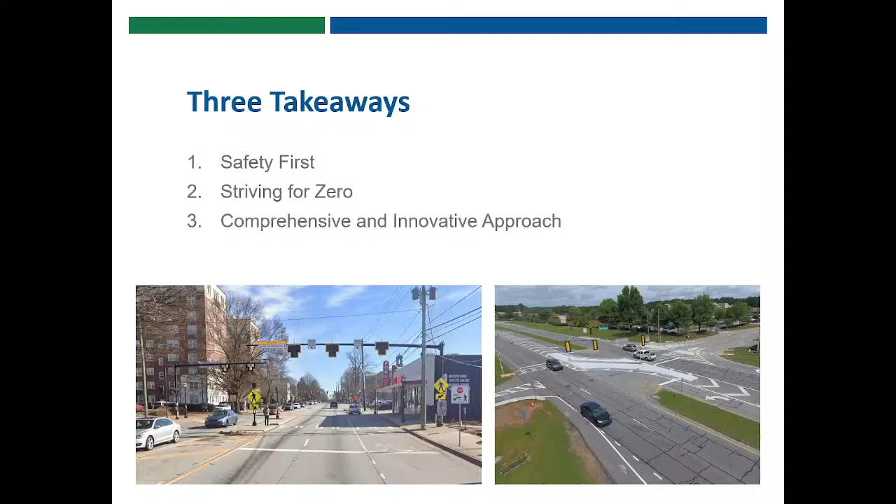A comprehensive and innovative approach: we like to take a proactive approach to address the multiple factors that influence crashes. By exceeding federal requirements, implementing innovative safety countermeasures, and using innovative data, we can be at the forefront of safety for this nation.

So the GDOT safety program, as I said, these are the HSIP dollars, federal dollars. And we look at things in terms of severity for crashes. As you can see below, we have the KABCO scale. K represents fatal, then you have your 3 levels of injury: A is serious injury, B is minor injury, and C is complaint injury. Then O stands for property damage only.

HSIP provides federal funds for the implementation of safety projects on our roadways. By conducting data analysis, we can allocate resources strategically and prioritize projects that will result in the most reduction of fatal and serious injury crashes.

We have safety performance targets, set by the state and assessed by FHWA. These include 5 metrics and 3 special rules. The metrics are based on number of fatalities, fatality rate, number of serious injuries, serious injury rate, and number of non-motorized fatal and serious injury crashes.

We also have 3 special rules: high-risk rural roads, older drivers and pedestrians, and vulnerable road users. That last one is actually the newest special rule that was signed into legislature with the signing of our bipartisan infrastructure law.

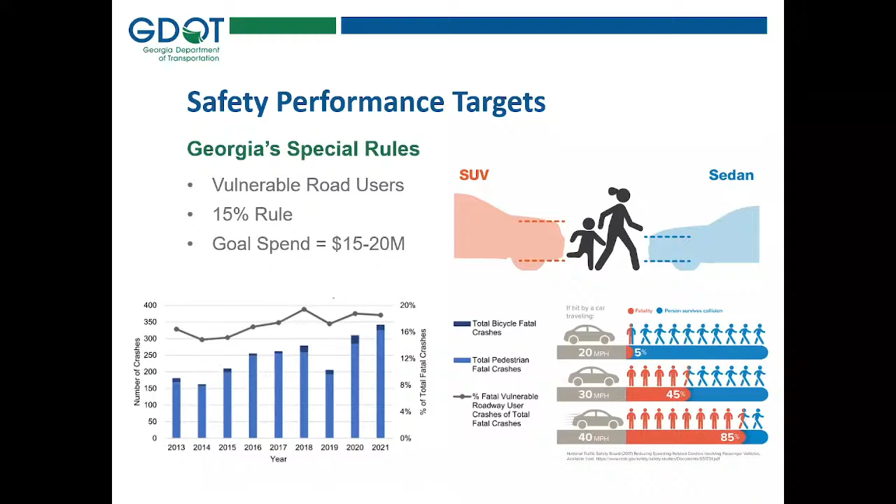That's 15%. I'll start with what is a vulnerable road user. These are pedestrians, cyclists, people walking, rolling, biking, whatever it may be, and they're vulnerable. If 15% of your fatalities are attributed to that emphasis area, the following fiscal year, you are required to allocate 15% of your HSIP apportionment to that emphasis area.

And here you can see some data why. At the bottom, we have a graph just showing the percent of our vulnerable road users compared to our fatalities. So we are definitely hitting that 15% mark, we're closer to the 18-20% range. So this is definitely an identified emphasis area for us.

And why? Well, because they're exactly what they are: they're vulnerable. Due to the size of vehicles, there's limited sight distance. Speed is very, very impactful when it comes to our vulnerable road users, and you have a much higher likelihood of not surviving a crash going 40 miles per hour.

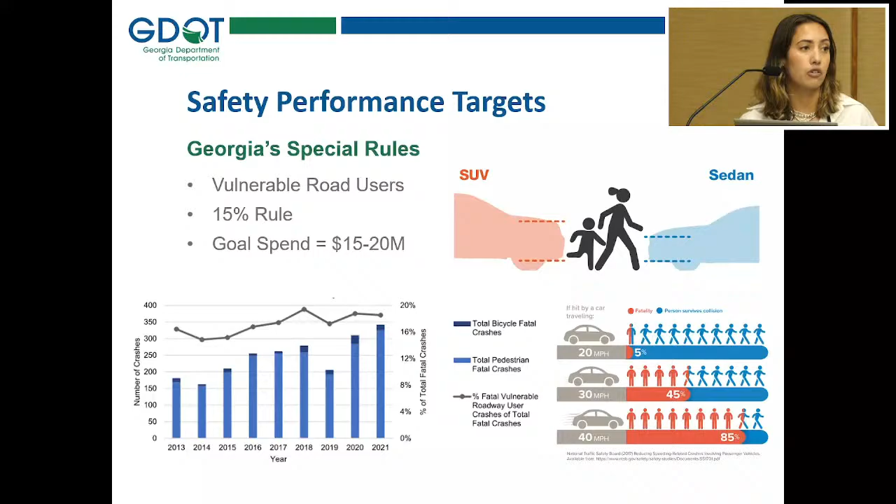All right, so why are we seeing this trend? What's going on? Because again, this is nationwide. This isn't specific to Georgia.

The year 2020 really marked a turning point with the pandemic disrupting daily routines, travel patterns, and overall road usage. Despite initial declines in traffic volumes during those early stages, unexpected consequences emerged with speed. The combination of fewer vehicles on the road altered driver behavior and increased risk taking, resulting in a surge of fatal and serious injury crashes nationwide. You can see data to support that. People were speeding more, not wearing seatbelts, maybe driving under the influence or distracted. People were stressed out, and that translated into their behavior on the roadways.

All right, so let's talk about Georgia and our crash trends and where we're going. I did this based on the 3-year moving average instead of the 5, because that's what we're moving towards. The reason I want to bring this up is because, due to the data we've seen since COVID, we're most likely going to continue having to write these implementation plans for the following years due to that data impacting us. As you can see, we were declining for fatalities from about 2016 to 2019, and then COVID really hit us hard.

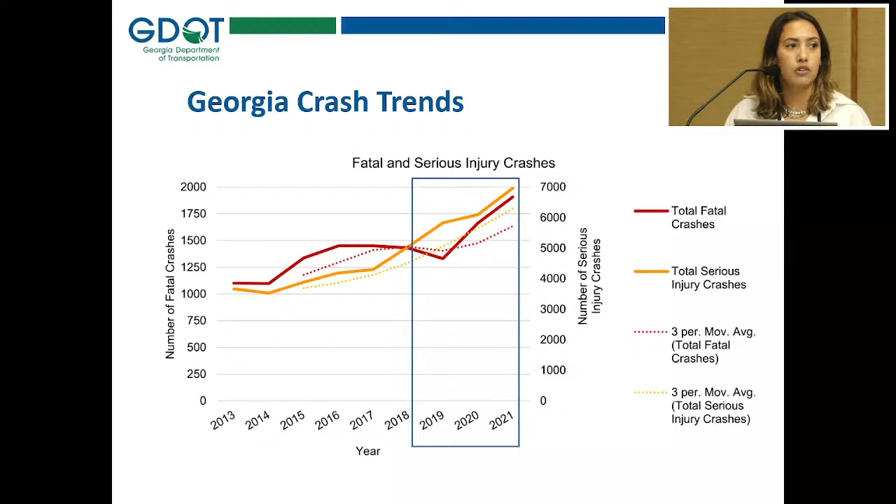And then nationwide, what we're also seeing here is just a general increase in our serious injury crashes, and I'll talk more about that soon. But for this year, 2023, we are seeing current trend downwards. So we are confident that we're actually making it out of those COVID years, you could say, and we're returning back to a more normal driving behavior, driving pattern, and things like that.

All right, so let's talk about the fatalities. 53% were roadway and lane departure, 20% of those being our vulnerable road users. And when we look at intersections and angles, 34% of our fatalities are happening at intersections, and angles account for 23%. This just shows you what we look at in the data and how we identify the projects to help reduce these numbers.

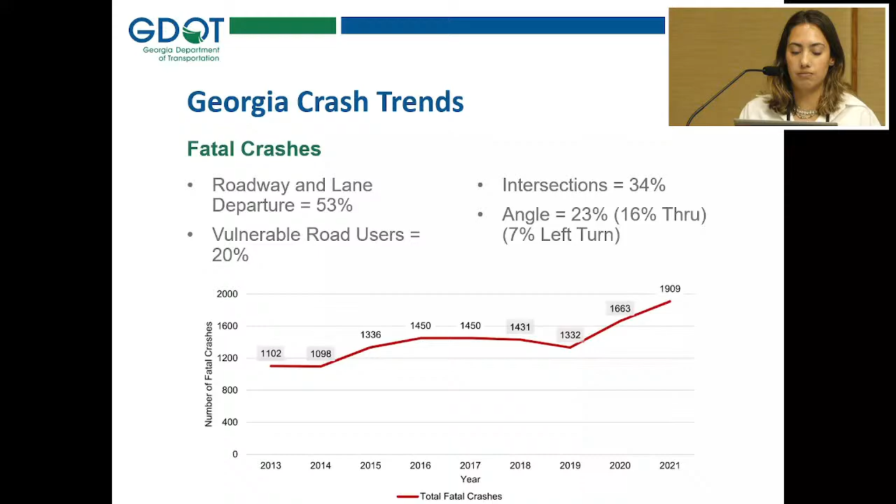Let's take a look at it by road user. Vulnerable road users include pedestrians and bicyclists here. You can see that pedestrians are much more significant than cyclists based on this data for fatalities, and you can see a marked increase too with the onset of COVID. That proportion is just increasing at, frankly, an unacceptable rate.

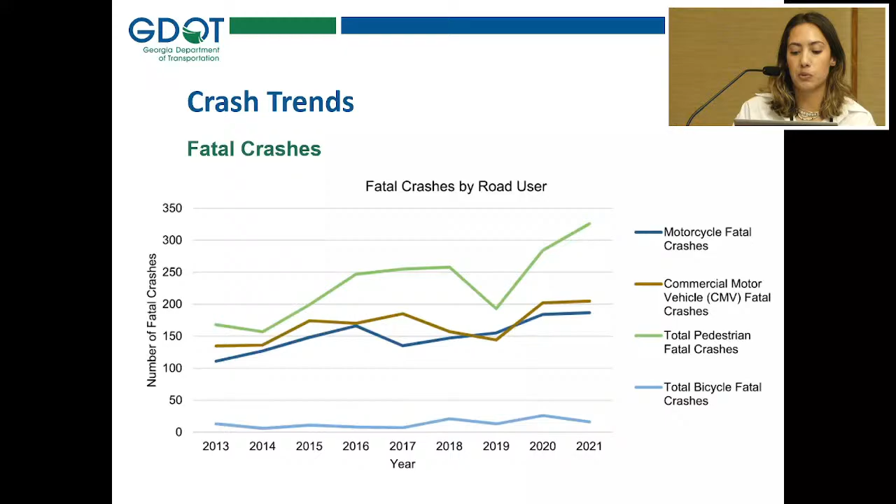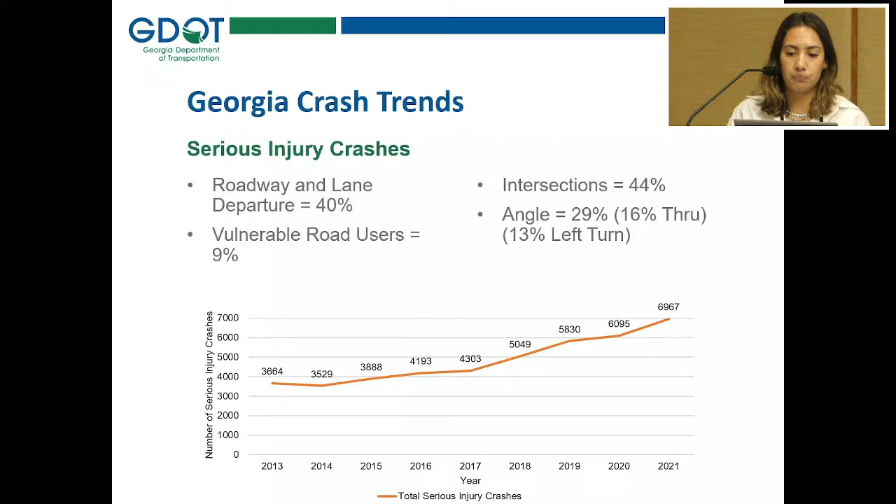All right, so that kind of leads into our emphasis areas. How do we come up with these emphasis areas? We look at the crash data. So here we are: we have our vulnerable road users, roadway and lane departure, intersections, which goes along with our angle crashes as well. And then I put our special rules, as well as off-system safety.

All right, so we are a benefit cost-driven program. So everything we do, we take a look at, and these are our numbers. Overall, we're seeing about 239 BC, and that's mainly due to all the rumble strip packages we've been doing. As we identified, roadway and lane departure crashes were an extreme emphasis area for us, so we rolled out rumble strips, cable barriers, those types of projects, and we're able to do so with quick delivery, and we're seeing reductions this year. But these are the type of improvements that we do for those specific emphasis areas. You can see we do lane reconfigurations, RCUTs, roundabouts, those type of intersection improvements, and then we also have our pedestrian and cyclist improvements.

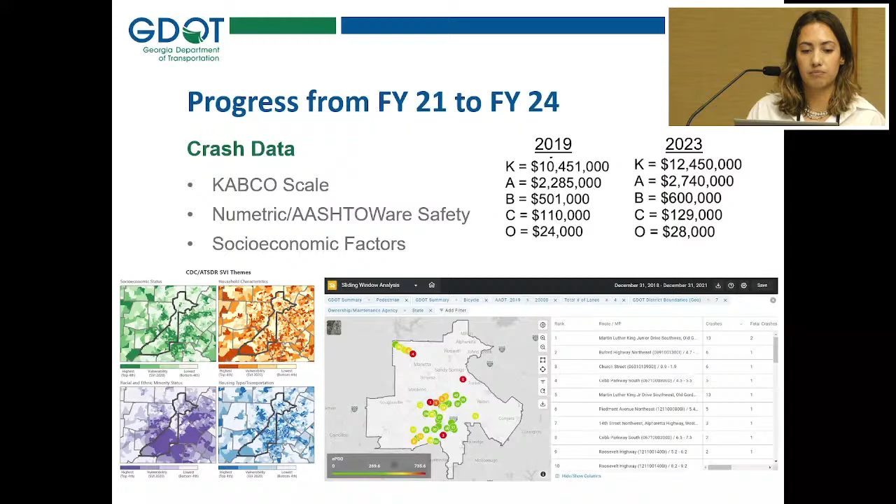Another goal was quick delivery, and again, we've been successful about this. From then to now, we have developed three new delivery mechanisms because our goal is to get to zero. How are we going to do that? We have to actually install infrastructure, so we need to make that as easy and accessible as possible. We've come up with a menu of service design, essentially a PDP light. Any project that has no right-of-way and limited environmental impacts can use this delivery mechanism, with a shortened P6 schedule, and we can get projects out in a year, which is incredible.

These types of projects can range anywhere from packages of PHBs all the way up to a roundabout. So there's a lot of opportunity with this delivery mechanism.

We also have our equipment purchase program. Basically, we'll purchase the infrastructure, and then the local agency has to install and maintain it. That's another way we can get that infrastructure out there faster, and it's also a great partnership with our local agencies.

This next one I'm most excited about is called IDIQ. For the first time ever, safety will have an on-call contractor that is able to go out and do maintenance type efforts. I don't know how many of you have been on RSAs, but you can imagine the number of recommendations - striping, signing, and marking - that we make on those RSAs. Now instead of making them and just pushing that off onto the district, we can actually implement those recommendations, which is great.

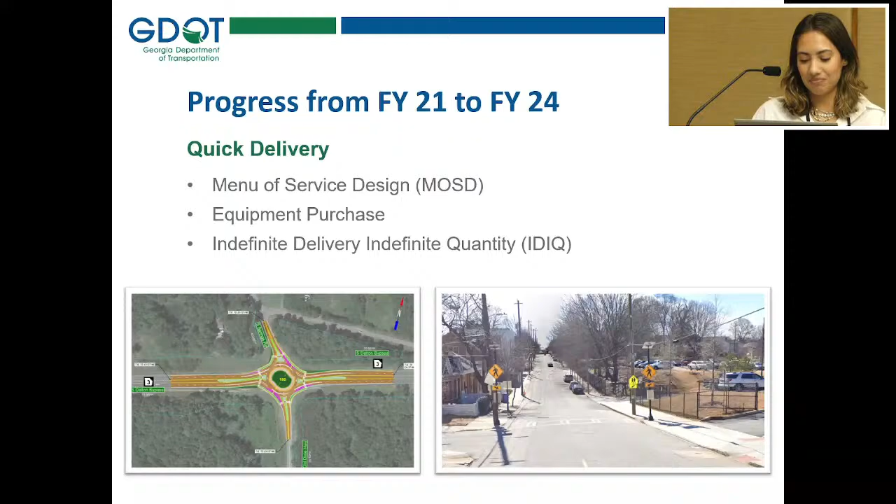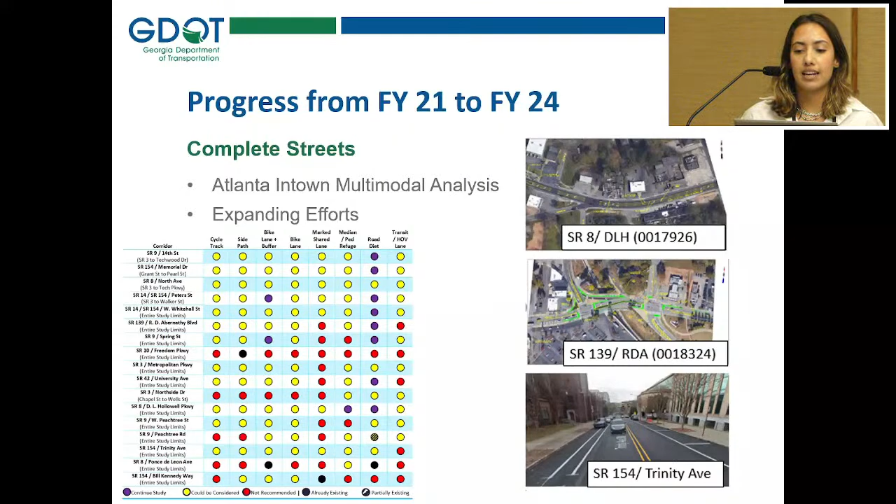Another thing we identified was complete streets. When we previously drafted this plan in '21, we had just finished the analysis for the in-town multimodal study. Since then, we have been successful at actually implementing those projects - great progress there. I think we identified a total of either 14 or 17 corridors, I can't remember, but a total of 9 are currently completed or in progress. What's really great is that has expanded into other complete street efforts outside of the city of Atlanta. So now that's another one of our emphasis areas - looking at roadway reconfiguration projects to help those vulnerable road users.

All right, so let's get into some noteworthy practices. That was the updates from the previous plan, but what else are we doing? What's new? Well, we're diving a lot more into systemic projects. One of them is sharp curves - we had some research conducted with Georgia Tech, and they came up with a really awesome tool that shows us where the sign should be and things like that, with different tiers of curves.

And then another one is our all-way stop - that speaks to the variability in crashes. Who knows when someone's going to be distracted and accidentally blow through a stop sign, resulting in a fatality. So what can we do ahead of time - advanced signing, advanced marking, alert drivers of the intersection so they're more aware - that's a little bit more of a proactive approach to safety.

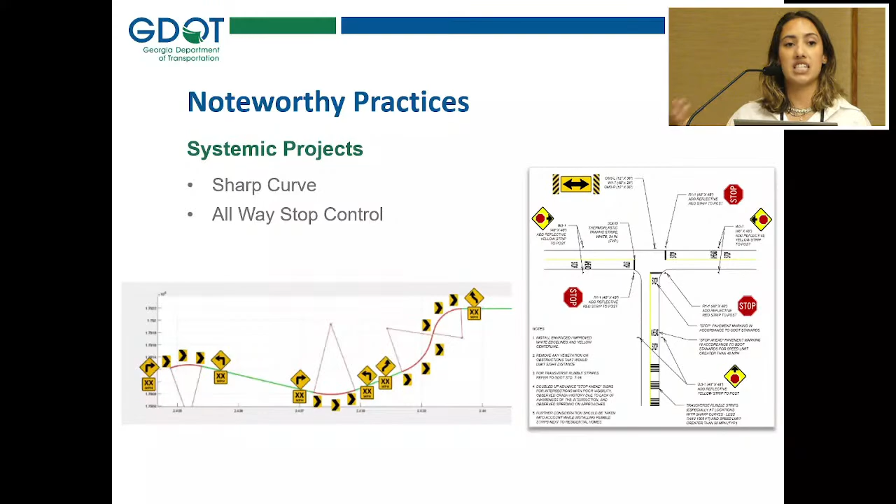All right, driver behavior, we talked about that, right? COVID changed driver behaviors, and that resulted in an increase in our fatal and serious injuries.

So under the umbrella of Drive Alert Arrive Alive, we have See and Be Seen for our pedestrians. We also coordinate with our office of communications, and they do PSAs for Drive Alert Arrive Alive on the interstate. They also do some for motorcycles as well, which we talked about earlier. The ones they do for that is Look Twice, Save a Life for motorcycles.

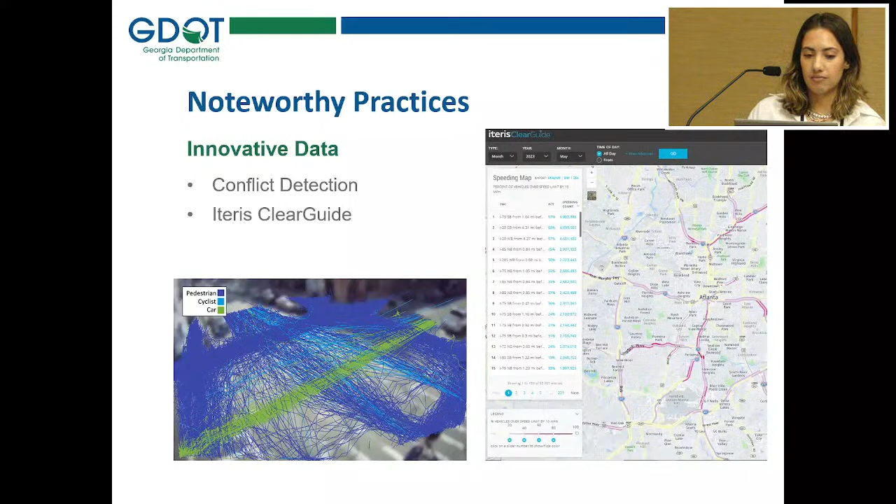And then tying in with the theme of the conference - oh, the places we'll go. This is what we identified in our plan as what we're working on, what we have in progress, and where we want to go with the program based on the data that we're looking at.

So again, our vulnerable road users - we actually have an entire other document that we're drafting about that. It's called the Vulnerable Road User Assessment, and that's due to FHWA in November. So we are currently working on that with in-house forces. Very proud to say that.

And we are also looking more systemically, looking at transit crossings, looking at trail crossings - how can we improve that infrastructure for our vulnerable road users and be proactive about it.

And then PHB design. On the bottom, you can see two PHBs on Ponce in the middle of Atlanta, and they look very different, don't they? So we have variations in the Z's, in the stage - one's one stage, one's two stage, and things like that.

So we're going to be doing some near-miss analysis on our existing PHBs to determine Georgia-specific preferences for our PHBs, essentially - determine optimal offsets as well as timing. Are there timing things we can do to help encourage vehicle and pedestrian compliance at these locations?

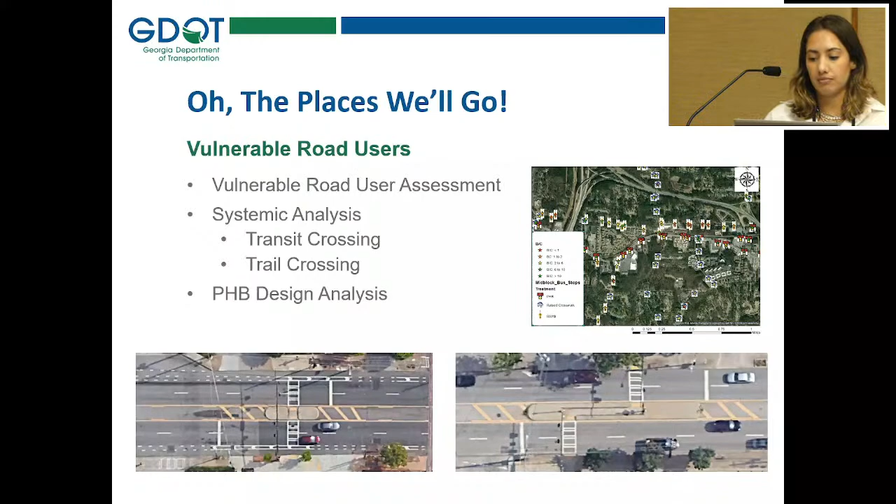And then, the places we'll go. Every Day Counts, EDC 7, is an initiative set forth by FHWA that promotes nighttime safety. We are going to do an urban focus, which will be our pedestrian focus, and a rural focus, which will be our sharp curves.

For our sharp curves, we're going to go back and do the LED chevron signs to help promote lighting, and then speed management as well. From COVID, the speeds really increased. The kinetic energy theory has velocity squared, so it's very impactful when determining the severity of collisions. So if there's something we can do to evaluate and help manage that speed, that's what we're going to be taking a look at.

And then our older drivers and pedestrians, we're going to dive deep into that data set. What's going on there? I took a high-level look, and it looked like there were trends generally increasing, with the number of fatalities increasing. But we want to take a look at that. When we talk about countermeasures, they're not really different from anything we're doing today. We just want to target them in the right places. So again, similar PHBs. Wrong way driving, that's a great one. Just target that in populations where we know there are higher numbers of aging individuals or senior living facilities, things like that.

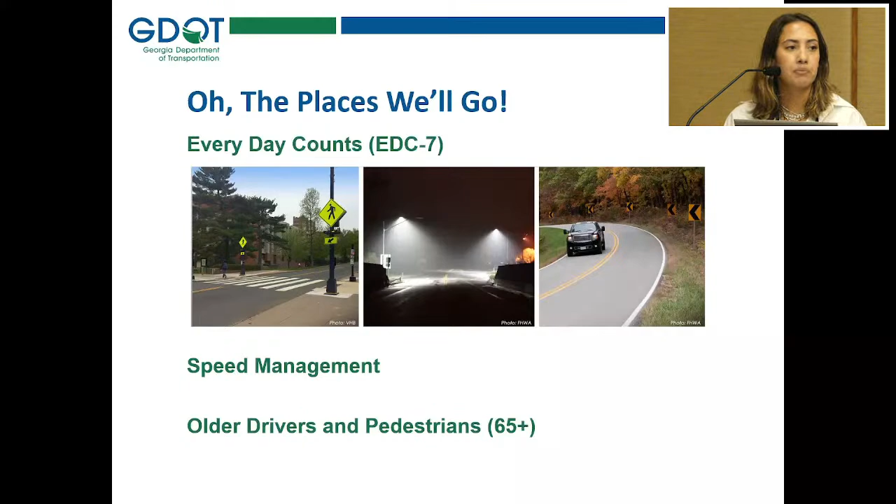And then going back to our 3 takeaways, safety first. We prioritize safety in every single project that we deliver. I know I'm talking for the safety group, but even outside of that, every single project that GDOT delivers has safety at the forefront. And we are constantly striving for zero. Our ultimate goal is to get to zero fatalities, and we're doing everything within our power to make that happen and make the roadways safe and accessible for all road users.

And then how are we going to do this? We're going to do it by taking a comprehensive and innovative approach, staying at the forefront of data, staying at the forefront of safety. And we'll hold questions till the end, but thank you very much.

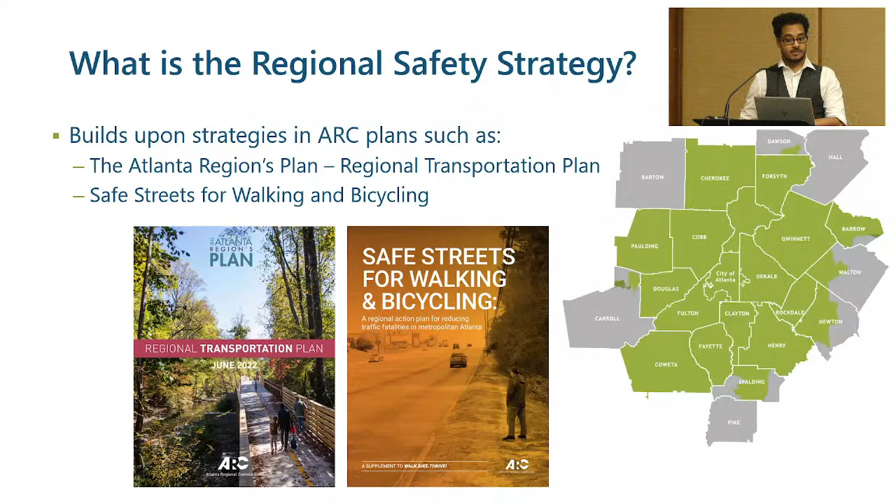One thing we really wanted to focus on were the economic and equity foundations of safety analysis and safety implementations. We took some FHWA analysis from a few years ago and focused it in on the Atlanta region. And what we found is that the average economic cost to the region of one fatality is $16 million. It's roughly $1 million for serious injuries. And those numbers are over about a 20-year period.

But if we take all of the crashes that occur within the Atlanta region and boil it down to year-over-year analysis, it's $9.6 billion in economic losses to the region. So that is what we are talking about when we are talking about increasing safety. It's not just day-to-day crashes, it's real economic loss to our region.

We also did an equity analysis, and the people who are most affected by these crashes, it's not spread equitably across our region. It's not just everyone. It's very focused on low-income residents, minorities, children, disabled individuals, and the elderly. They are disproportionately the people who are most likely to suffer from these crashes and serious injuries, and that is not even taking into account the familial and social effects of these crashes.

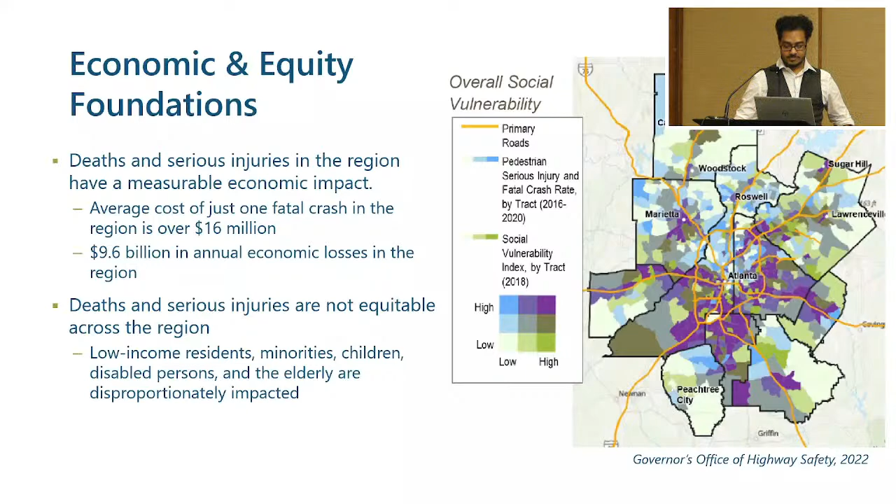Going into the planning side of it, how did we develop the RSS? We did a deep literature and data review, both of literature and data within the Atlanta region, national studies. We looked into NACTO and AASHTO studies on safety. We even went a bit internationally and looked at some international studies on safety and safety engineering.

We did really good stakeholder and public engagement through regional surveys, workshops, stakeholder interviews, and citizen focus groups. All of these were done virtually because we started at the peak of the COVID times when there was very little, if any, in-person, face-to-face work. But that allowed us to really reach out to a lot of more diverse stakeholders than we were usually able to do, and do it much more efficiently and economically. So rather than having to go to the outskirts of our region physically, we could do things over Zoom and Teams. And there are pros and cons to that. We were able to find a lot of pros by being able to do more interviews and engage more people than we are typically able to.

We, of course, did some really deep and robust data analysis and statistical regressions of our crash types, as well as a network analysis of what our roads look like and which road types typically lead to severe crashes. And we boiled all that down into safe street visualizations, which I'll give you a preview of, high-risk scenarios and lower-risk scenarios. How can we take roadways that are currently likely to lead to high-risk crashes and implement certain planning and engineering techniques to make them safer?

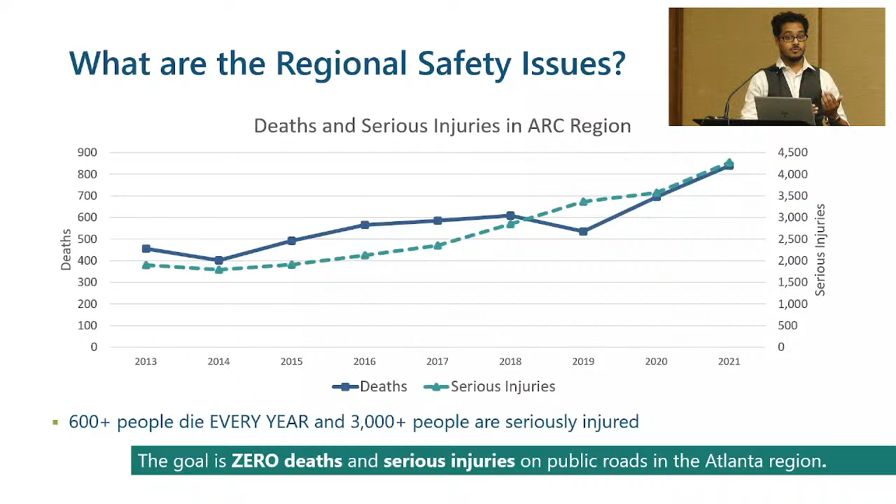We decided to focus in on three main crash types for this because they are the most prevalent within our region and the ones that are most likely to result in fatalities and serious injuries: crashes at intersections, crashes involving roadway departure where a car fully or partly leaves the roadway, and those involving pedestrians and bike riders.

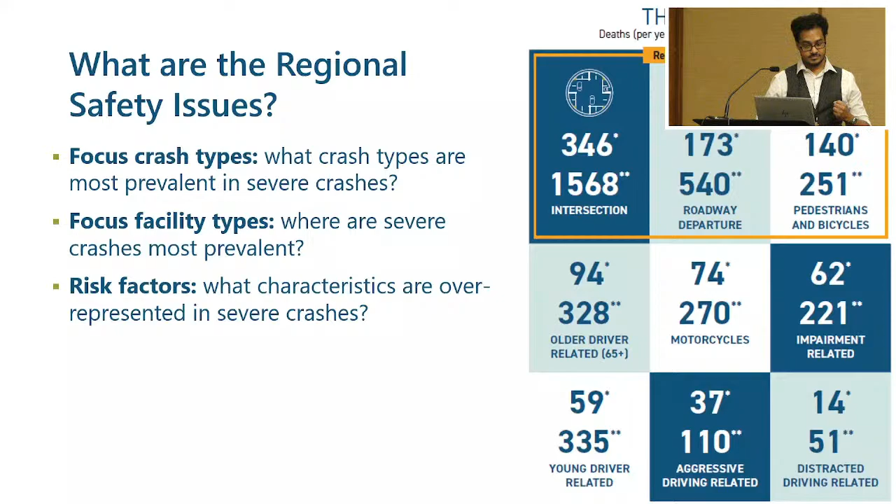And for that, we decided to focus in on what we're calling risk factors. So these are things where, from a community context or the context of how a road is built, it is likely to lead to higher risk crashes, to those fatalities and serious injuries. This is a proactive way to approach safety planning rather than just chasing crash data. So what we found for intersection risk factors is functional classification, ownership, operating speed, observed speed, community context, and traffic control techniques are things that lead to riskier behavior.

For functional classification, it is our principal arterials, minor arterials, and major collectors, these higher functional classification roadways that we see more of these intersection-related factors on.

Ownership is more of a proxy. So saying GDOT ownership, changing a roadway's ownership from local to GDOT or vice versa is not going to automatically make a road higher or lower at a safety factor. It's a proxy because GDOT roads tend to be wider lane, higher speed. They tend to have certain sightline issues that either cause speeding or can cause riskier behavior. All the work that Kelli and her team at GDOT are doing are actively trying to address those factors, but historically, roads owned by our state DOT have these risk factors that lead to riskier behavior, riskier driving, and these more severe crashes.

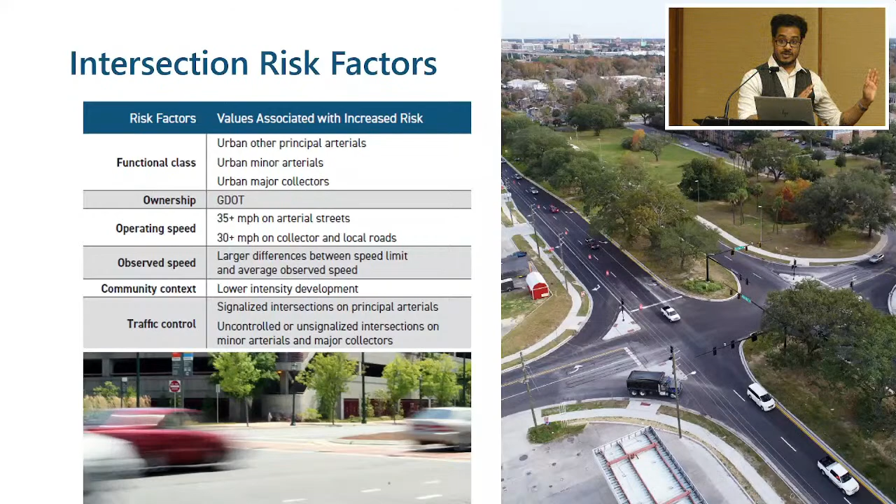Or are these very urban areas where you see smaller block sizes, a mix of residential and commercial use? For traffic control on principal arterials for intersections, we see high risk at signalized intersections. For lower functional classes, unsignalized or uncontrolled intersections are more risky. So all of these are very context dependent on multiple factors, and that's something we are trying to be aware of.

Moving a bit faster to roadway departure, somewhat similar factors apply: functional classification, ownership, traffic volume, posted speed, and community context are also very important risk factors here.

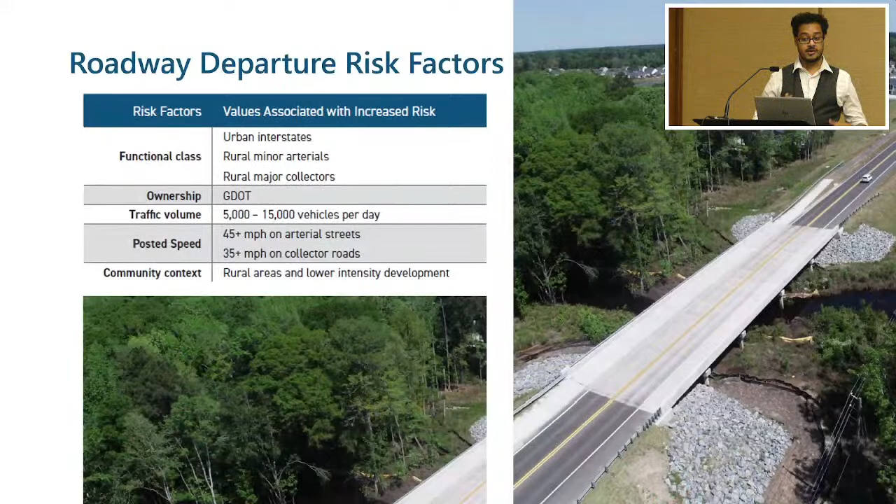For pedestrians, much of the same, but the numbers change a bit. Functional classification, we also see principal and minor arterials. Ownership tends to be GDOT roads, so it's our state roadways that see the most risk for pedestrians. Traffic volume and number of lanes really stand out as high risk factors—roads with over 9,000 vehicles per day and 4 or more lanes have the highest risk for pedestrians.

For community context, this is where we get into the more urban and dense areas. These are the places where people more naturally want to walk shorter distances and where we see more pedestrian activity, but we haven't always created a built environment that is comfortable and safe for those people to walk. For socioeconomic class, we see lower income and higher minority populations tend to be the most vulnerable.

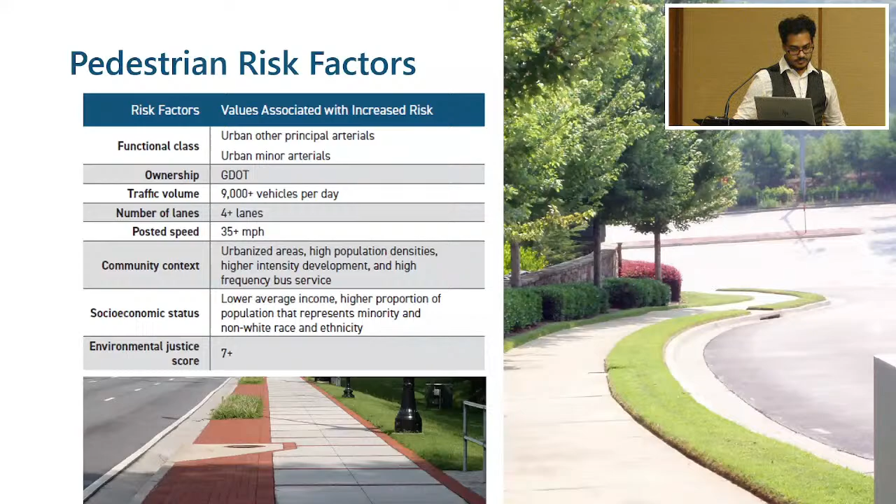For bicycle risk factors, we see a shift in ownership to our cities and counties—they are most likely to have streets that seem safe for biking or have some kind of bicycling infrastructure already in place. We also see a shift in traffic volumes and number of lanes, to those with 2 lanes or 2 to 4 lanes. Community context is still that dense urban area.

An interesting thing we pulled out from the data is a socioeconomic context. Those most likely to bike and most likely to find themselves at risk as bike riders show a bimodal split: those at the lower 20% of median household income, as well as those at the upper end of the scale. These people at the lower and higher end of the income scale all have very different reasons for choosing to bike—some might do it recreationally, some as an alternative to driving while saving up, or some for purely environmental reasons.

In some ways, that's very useful for us to consider from an equity perspective. In other ways, it doesn't matter—these are all vulnerable road users because for whatever reason, they are choosing to take a bike out onto the roadways, and we as public agencies need to serve them all.

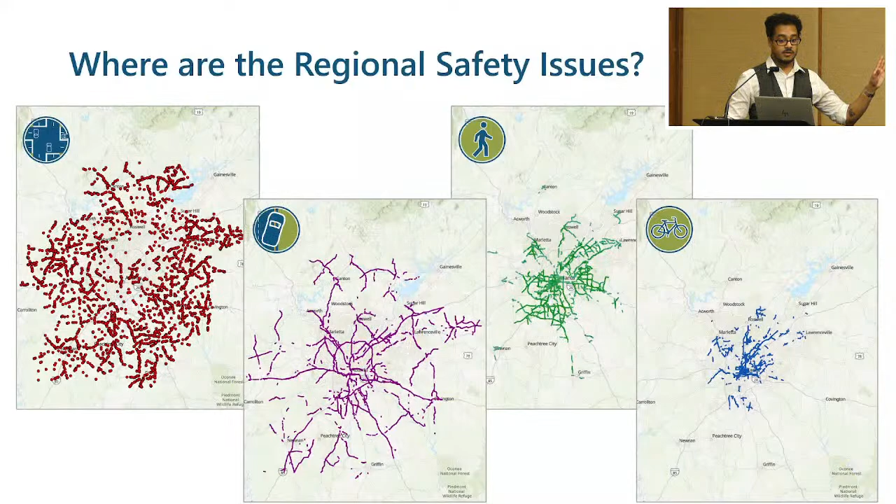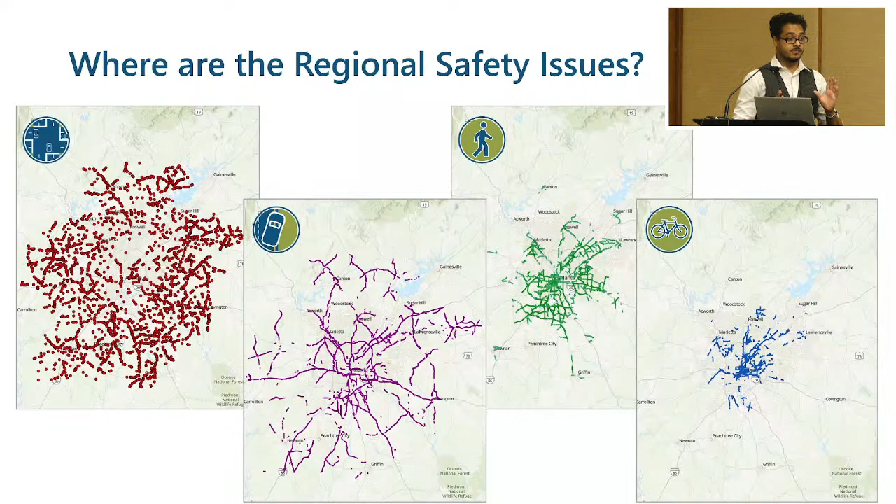We were able to take all of this data and create maps that are publicly available on ARC's open data website. These rank every intersection and every roadway and street within the ARC region on these different risk factors—for intersections, roadway departure, pedestrians, and bike riders. These have already been distributed to our local agencies, our friends at the GDOT planning office, and private consultants and friends in academia have also used them for their own analyses. This is a product that has already been distributed pretty widely.

For all of these, we want to focus in on proven safety countermeasures. These are from FHWA—engineering and planning techniques that local, state, and private agencies can really focus on, that we know can help solve a lot of safety issues.

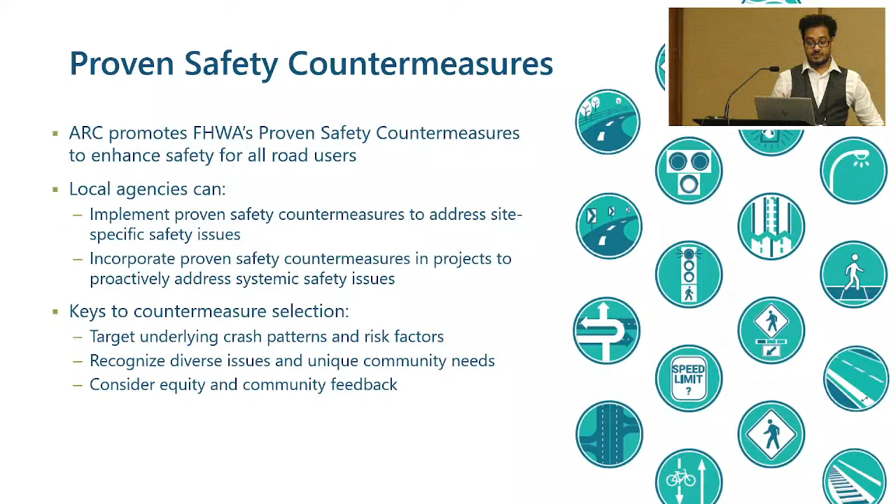For intersections, we see some simple things such as backplates with retroreflective borders. We see roundabouts becoming increasingly popular within the region and within the state. I believe GDOT has over 500 roundabouts throughout the state, with that number expecting to double within the next few years.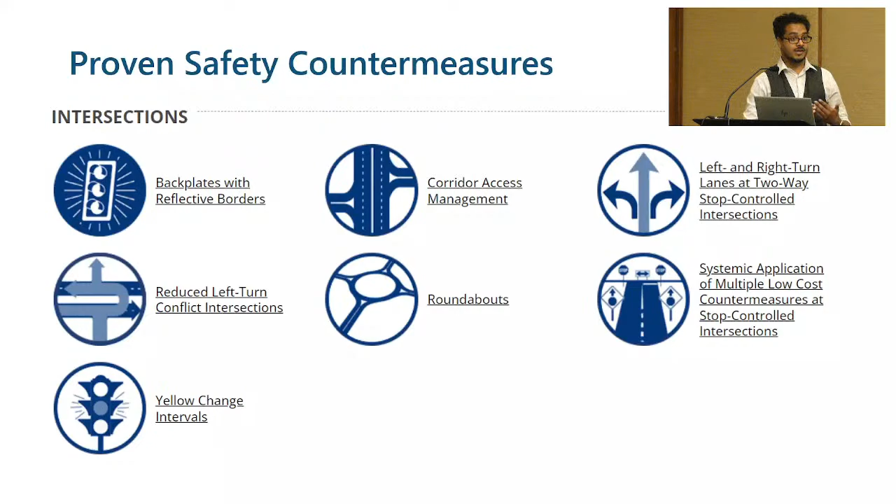So roundabouts are something that our partners at the state level are really aggressively trying to build out throughout our state, and that's something that at ARC we are happy to see. Various methods of corridor access management, R-cuts, yellow change intervals - these are all standard engineering techniques of ways to re-signalize intersections or rebuild an intersection, and they all have massive safety benefits.

Roadway departure, it is those rumble strips and safety edges that Kelli mentioned a little while ago. It is median barriers, having those guardrails along the side of the road that really help to prevent roadway departures, or when they do happen, make them less likely to result in a death or serious injury.

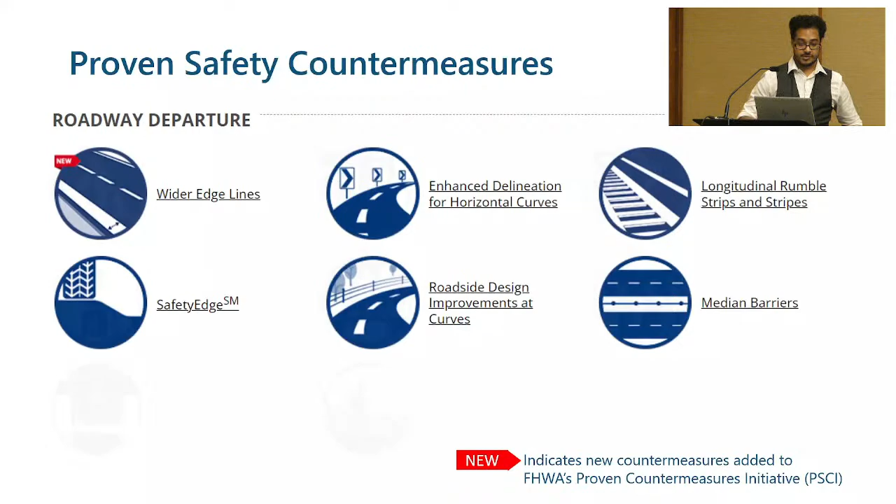For pedestrians and bicyclists, a lot of these work for both, and sometimes it's just a matter of how much right-of-way we use. Simple things: crosswalk visibility, pedestrian-focused lighting, bike lanes. At ARC, when we're doing project evaluation, we are largely going to be looking at bike lanes that have some kind of protection of steel, asphalt, or concrete. That will be context dependent. There are certain areas where just a strip of paint might be useful, but by and large, we're seeing that paint is not protection. So we're looking at some kind of barrier between people driving and people riding a bicycle.

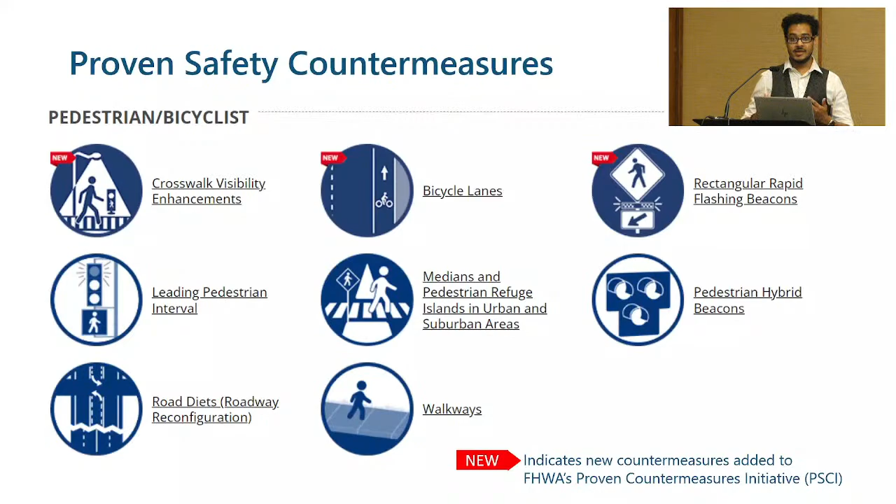Walkways and trails are a very standard thing for pedestrians and bike riders. So none of this is very new when it comes to engineering. It's just stuff that, for too many of our roadways, has been under-implemented.

And of course, speed management. This is something that can help drivers, pedestrians, bike riders, all kinds of roadway users. Anything that can help reduce speeds - whether it's speed safety cameras, which are currently not allowed within the state of Georgia, but if they were, these could help from an enforcement mechanism - variable speed limits on certain roadways, and then certain planning techniques such as local road safety plans or RSAs that our state is very aggressive at planning out and partnering with local agencies to do.

A little bit on our engagement approach. We went from a regional perspective. We had committee presentations to our governing committees. We did a lot of online surveys. We had a focused workshop that involved staff from ARC, our consulting groups, as well as some outside and citizen groups.

We did targeted interviews around the region and with peer MPOs and DOTs across the nation to better understand what they are doing to implement safety projects and to plan for them. And then we had, I believe, 7 citizen focus groups all across the region to gauge what our citizens and our nonprofits really want us to look at when we're doing safety analysis and implementation.

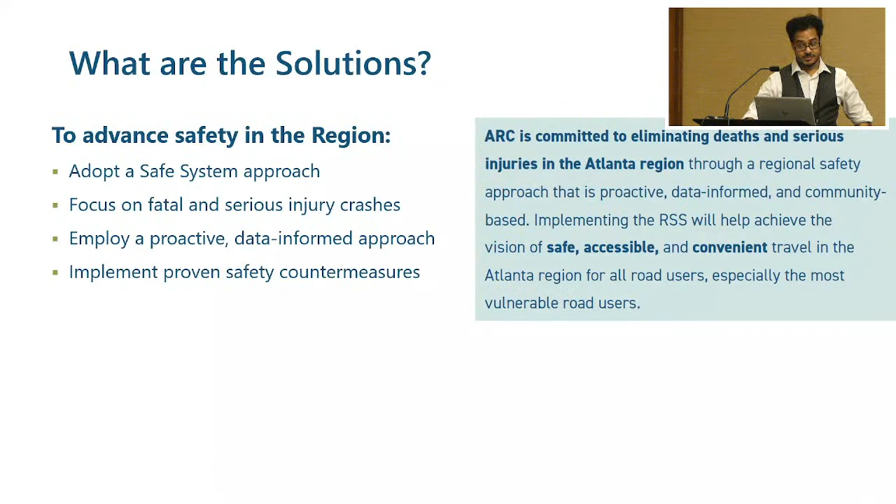Now let's go into the solutions. We want to adopt a safe system approach. This is something we're seeing the federal government really push, and something we got a few months ahead of them on. So, a few basic tenets of the safe system approach.

Deaths and serious injuries are unacceptable. We want to move to Vision Zero. Humans make mistakes, they are vulnerable. We just have to acknowledge that no transportation system will ever be perfect because they're being operated by imperfect beings.

Responsibility is shared, and that's a core thing of this, it's not about casting blame. This is not about litigiousness. This is the idea that responsibility is shared. So if certain roadways are seen as unsafe, there is a responsibility from the politicians in charge of that roadway, and the planners and engineers who made it or who could remake it. It is about accepting responsibility that I have the ability to do something different, so I should.

Redundancy is crucial. We have to create various ways that a roadway is safer, and safety is proactive. If we understand that a roadway is unsafe, we should try and fix it before there's a serious crash.

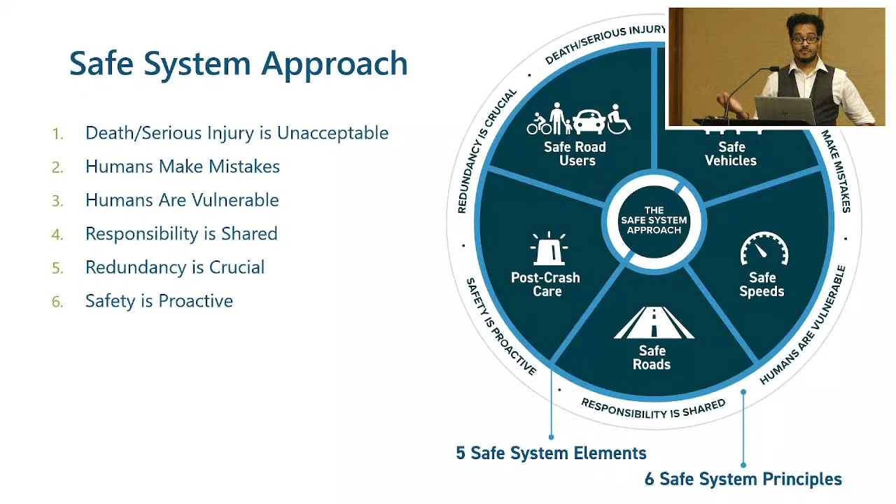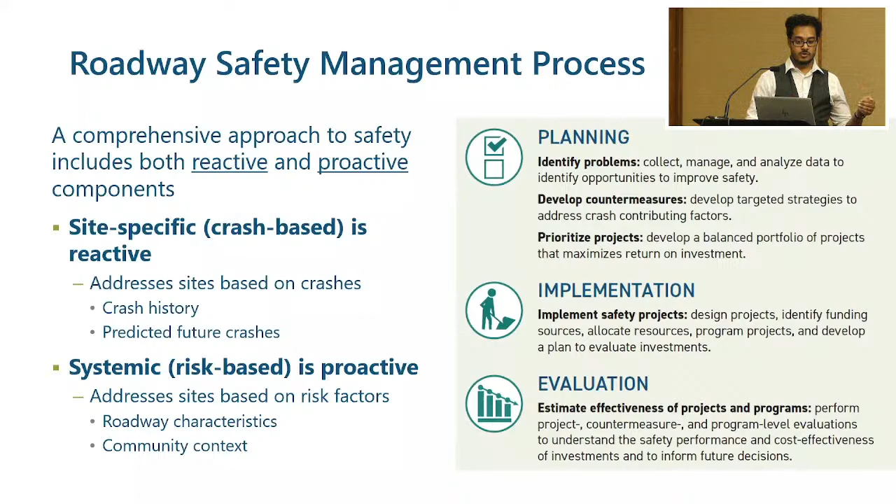Site-specific, crash-based versus systemic - we have to use both of these techniques. Some of it will be reactive to crashes and unsafe areas we already know exist, and some will be systemic, where we don't know if a crash or near miss has happened here, but we have proactive data analysis that suggests yes, it could happen here. So we have to combine both techniques moving forward, but at ARC, we're moving a bit more towards that systemic and proactive analysis.

Just to show off the map again, about one way we can be more proactive, we created a lot of high risk and lower risk scenarios for engineering and for visualization. I want to just go through one or two of them rather than all of them, given our time constraints.

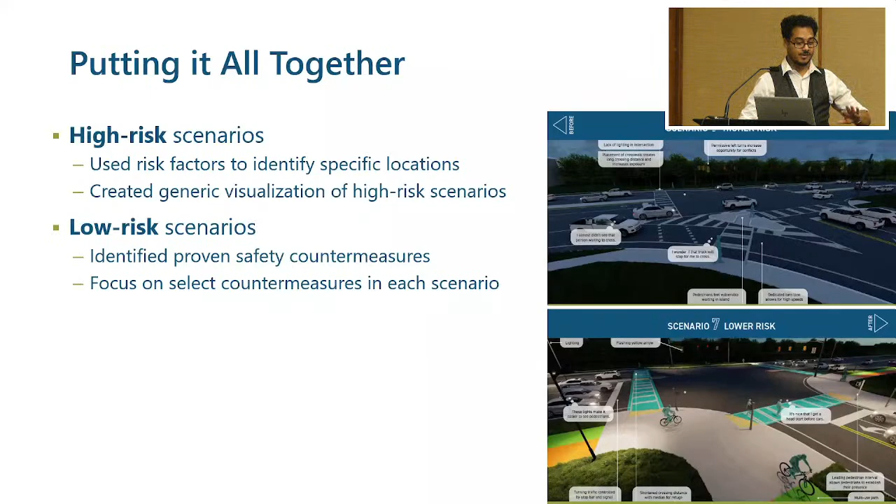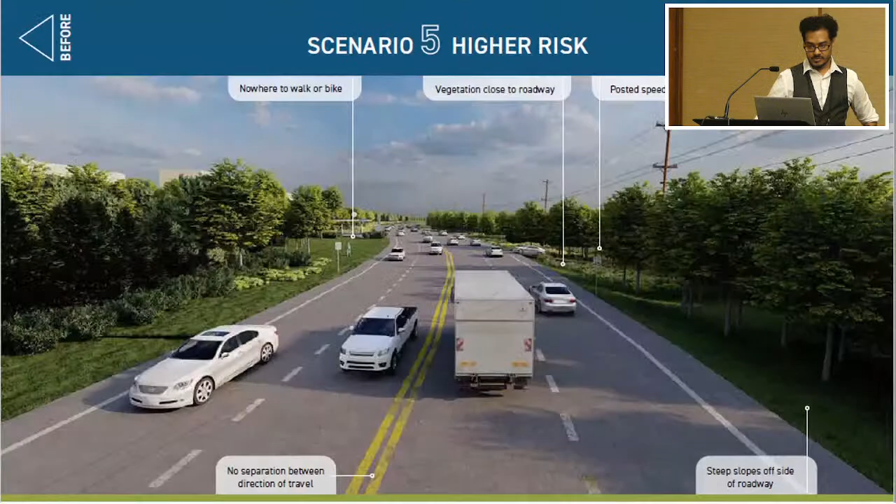All of these are on the menu of engineering techniques we can use. Most roadways are not going to go from this to this, but if we use even a few of these techniques to make roads safer, there's a lot of value in that for people who use it. So that's the idea here. It's not that you have to use all of these engineering techniques, it's that all of them are available to us and we should begin using more of them. Gonna skip ahead.

All right, a little bit on the safe system approach again. Our traditional approach for decades has been preventing all kinds of crashes. Safe system suggests let's move specifically to deaths and serious injuries. If we can reduce the most severe crashes, we are likely to reduce all the other ones as well.

We focused previously on improving human behavior. Safe systems suggest that humans are going to make mistakes. We should care about human behavior, especially when it's something preventable through more education. But in general, we should care more about designing for human mistakes and limitations, that we can fix a lot of these human behavior problems, such as speeding and distracted driving, through engineering techniques. We can either make them not happen at all, or if and when they do happen, reduce the risk. We can make more fender benders as opposed to deaths and serious injuries.

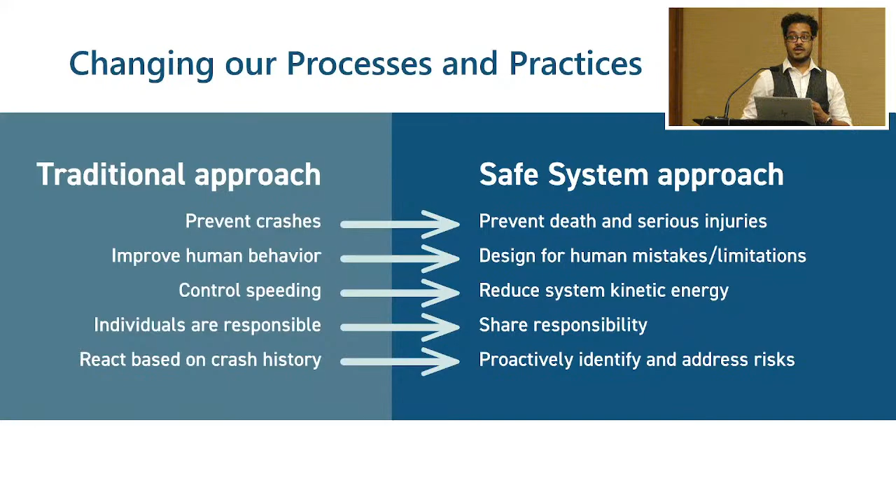Controlling speeding is still very important, but the overall goal is to reduce system kinetic energy, which is still going to be speeding focused, but there are various ways we can do that other than just focusing on speeding. As opposed to saying individuals involved in the crash are responsible, we all share responsibility. Everyone who is involved in creating and managing a roadway has some level of responsibility and culpability, so let's use the power we have to make a safer system.

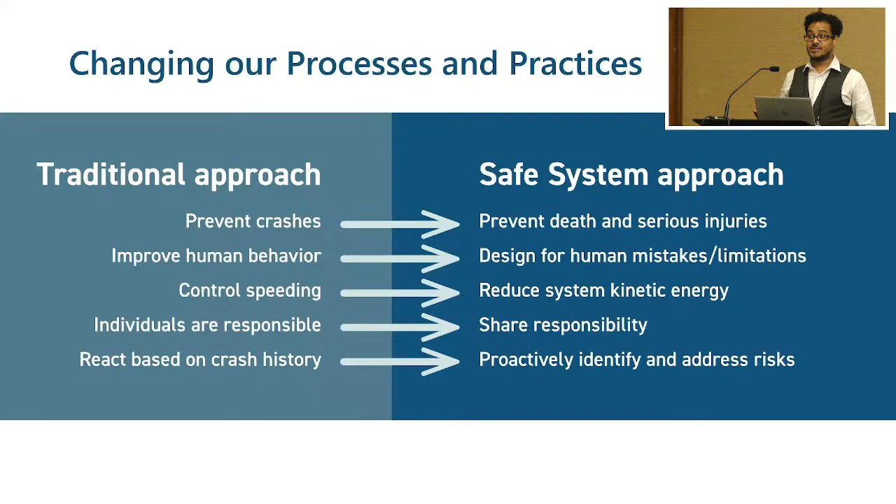As opposed to reacting just based on crash history, we proactively identify and address those risks. There's a regional and local focus of what ARC should do versus our local governments, and this is something where we're continually trying to find the right balance. Our local and state governments are the ones building and managing these projects, so they share a little more responsibility compared to ARC.

But we can fund projects if they seem good. And moving towards zero is continually on our minds, and we're trying to figure out the best ways that we can actively do that year over year.

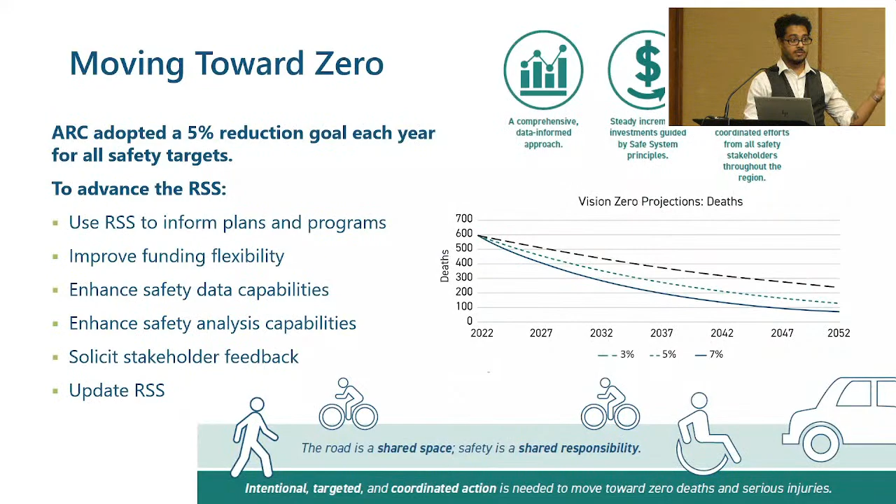Recent progress: we've had a lot of local plans implementing the RSS and similar techniques. We've had 10 action plans from the SS4A within the Atlanta region. The city of Atlanta was awarded $30 million to implement an actual engineering solution, and the city of Atlanta is developing a Vision Zero plan. Cobb County, Paulding County, and our 4-year metropolitan plan update are also using these planning techniques. So we've seen a lot of progress in implementation of this plan. Thank you all for your time, I hope to take your questions at the end of this.

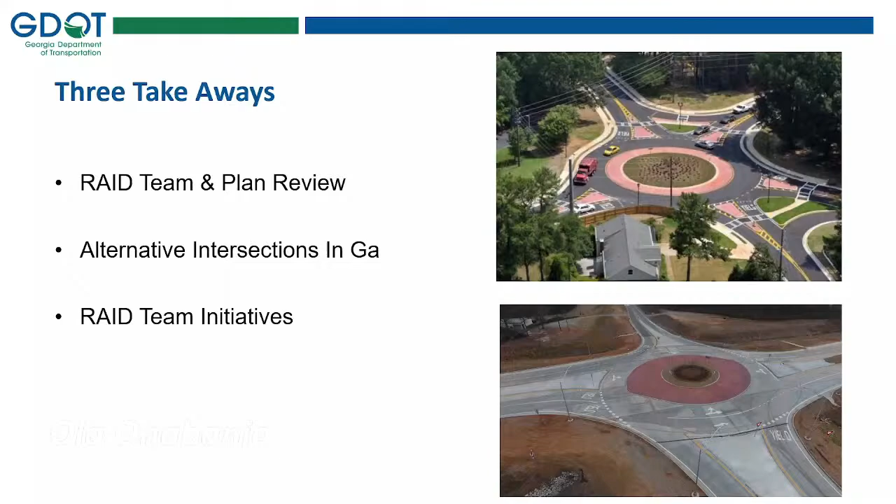This is part of GDOT's mission statement: a transportation system focused on innovation and safety. These goals are what we focus on so that we get the best out of our intersections and corridors. Here's a map of Georgia, where we have 159 counties, 7 GDOT districts, about 59,000 square miles of farmland, rural, urban, coastal, and mountainous terrain. So we've got a little bit of everything in Georgia that we have to deal with in context of alternative intersections.

But before we proceed, got a quick pop quiz. Can anyone name the county that has the second most roundabouts on and off system? I know the first would probably be easy, that's why I'm not trying to part ways with my beverage. But if you know the second one, you can have my beverage.

Darn it. And the first is Fulton County, of course, doubling that of Gwinnett. So here's a map of GDOT, our progress on roundabouts, roughly 400 operational statewide, 50 under construction on state routes, and about 30 being proposed on state routes as well in design.

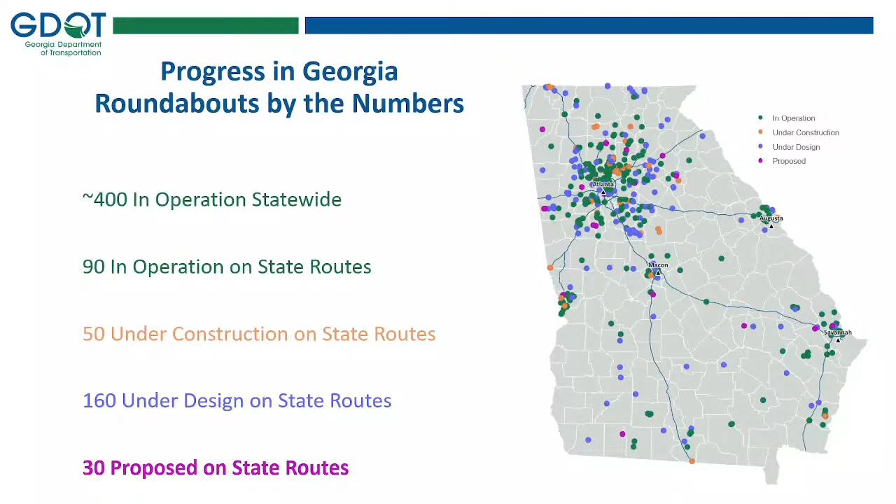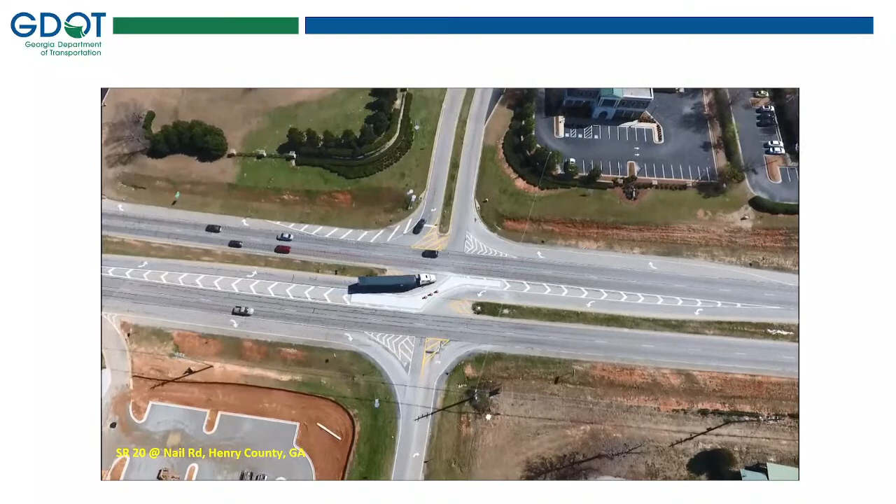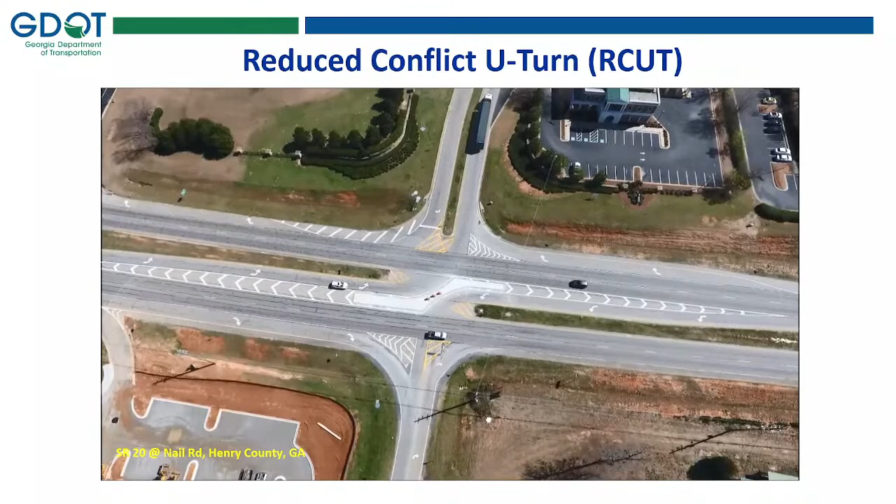So, alternative intersections. This section will just kind of show of hands of anybody recognizing what this is. RCUT, correct? Reducing the through, or redirecting the through and left turn from the side streets to utilize downstream U-turns. RCUT is a proven safety alternative versus open median intersections.

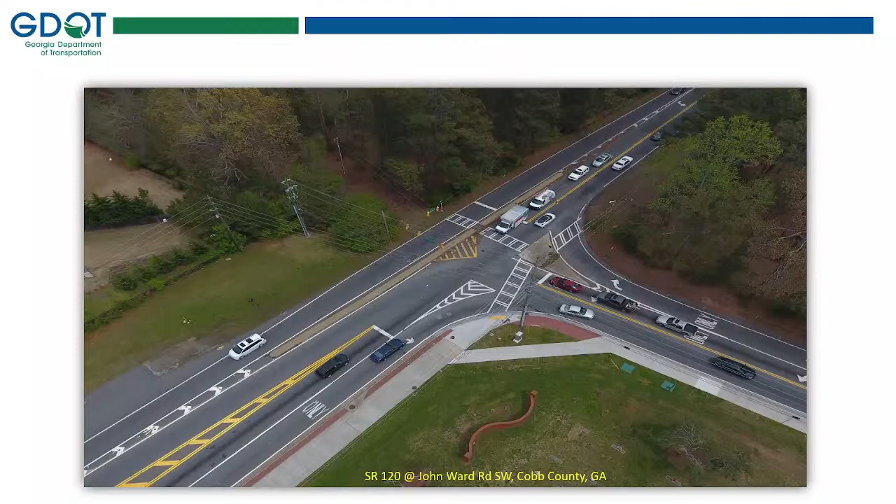Next one here, anybody can tell me what this is? Green T, it is. It's a signalized variant of the high T, so you have continuous flow on the main line and a channelized left turn from the side street. Here, can anybody tell me what these are? Big circle? Close.

So the answer is mini roundabouts, yes, small circle - fully mountable central island, ICD ranging from 70 to 90 feet, with illuminated bollards in the central island to give drivers the perception that there's something in the center of the roadway intersection.

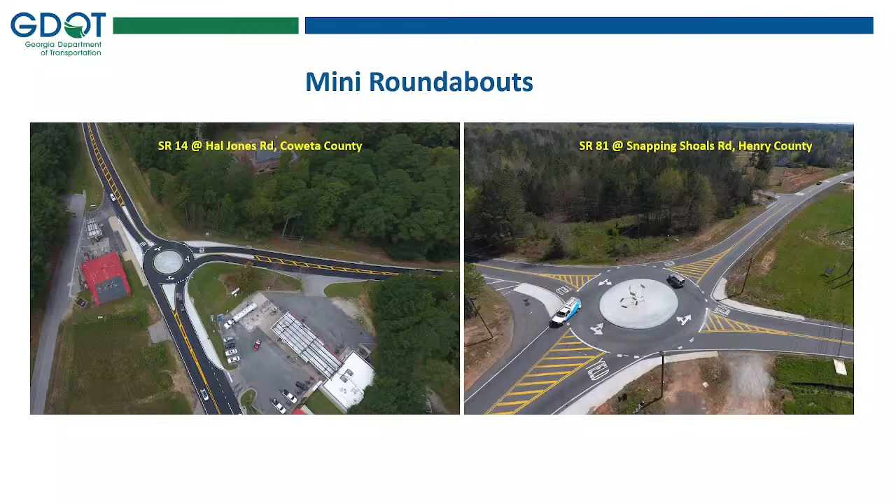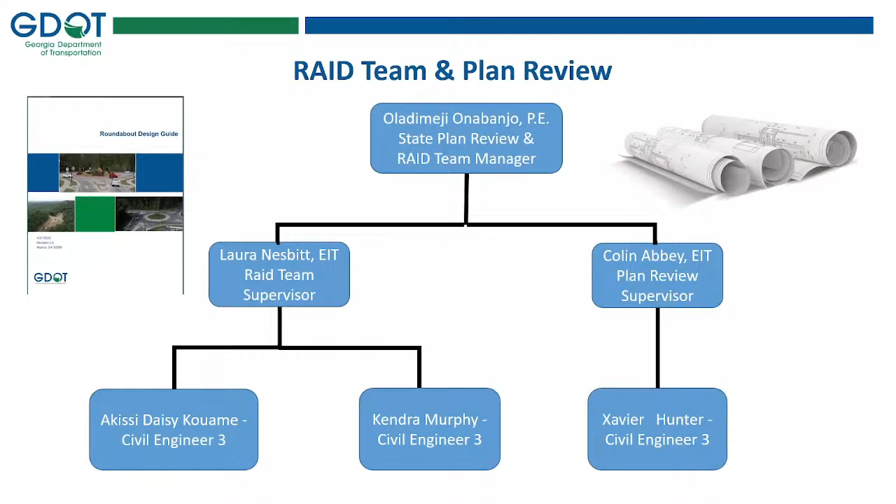Next, I'll introduce the RAID and plan review groups. This is the team: Laura Nesbitt is the RAID team supervisor, with Daisy and Kendra underneath her. Colin Abbey is the plan review supervisor, who has Xavier Hunter.

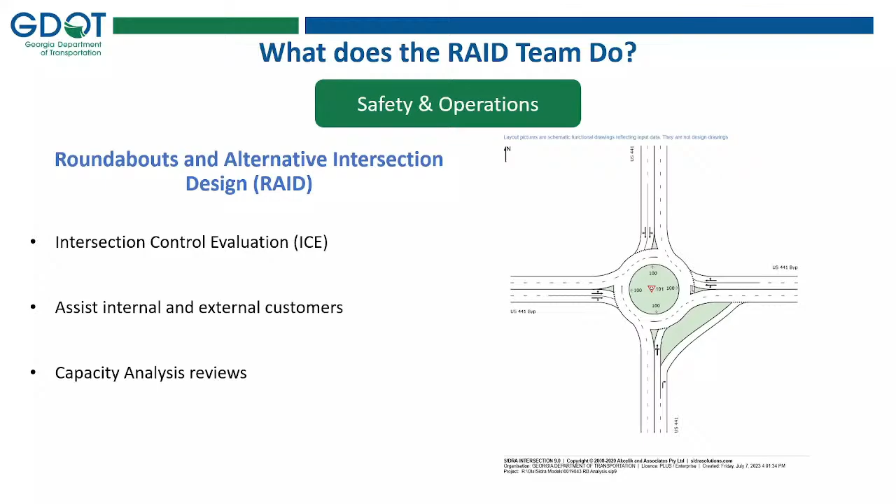Starting off with RAID, some of you might want to know what RAID stands for: Roundabout and Alternative Intersection Design. For the most part, the team handles ICE evaluations. It's a data-driven process where we're provided with crash data, ADT volume, and truck volume percentage, using that information to find the best feasible alternatives for an intersection or corridor. They also review capacity analysis and provide assistance to internal and external customers - internally, concept layouts or design refinement, and externally, courtesy reviews for roundabouts.

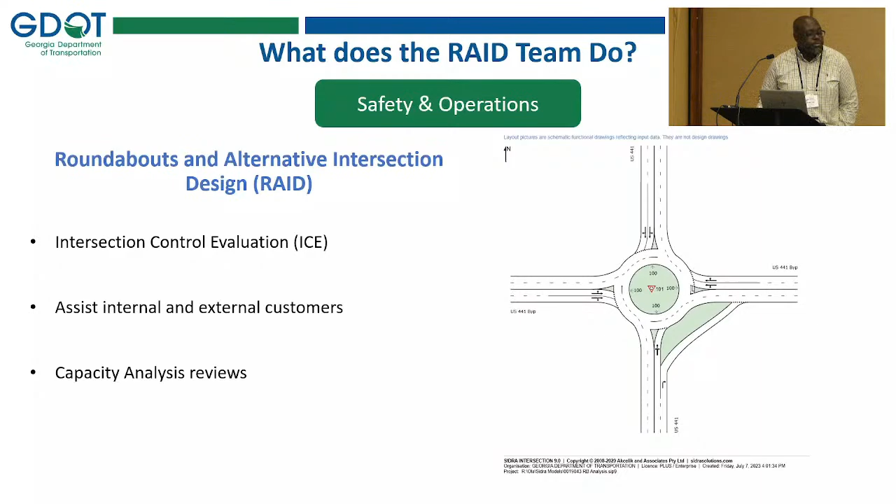Next, they're responsible for roundabout in-service reviews, where we sit down with the local district and get their feedback on what's going on with certain roundabouts and how we can update them, how we can make mitigations so they can improve operations and safety at the location. The RAID team also provides alternative intersection design guidance, operational reviews, and gathers OSOW data for geometric checks.

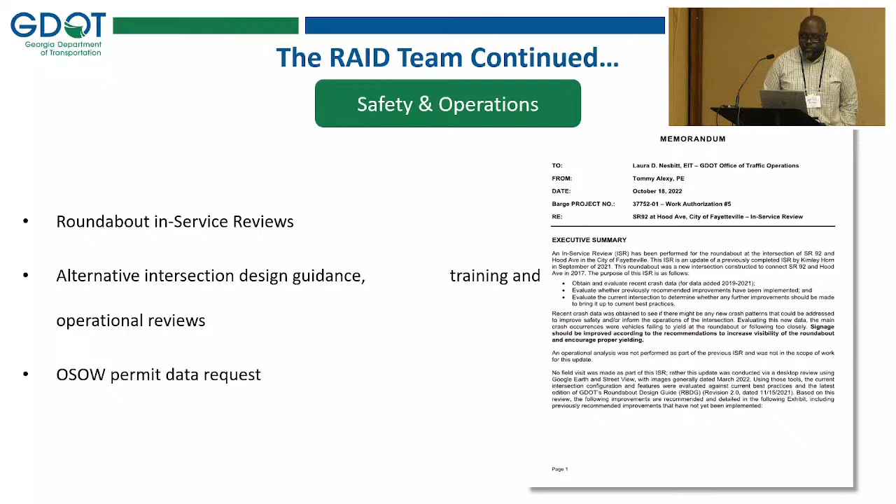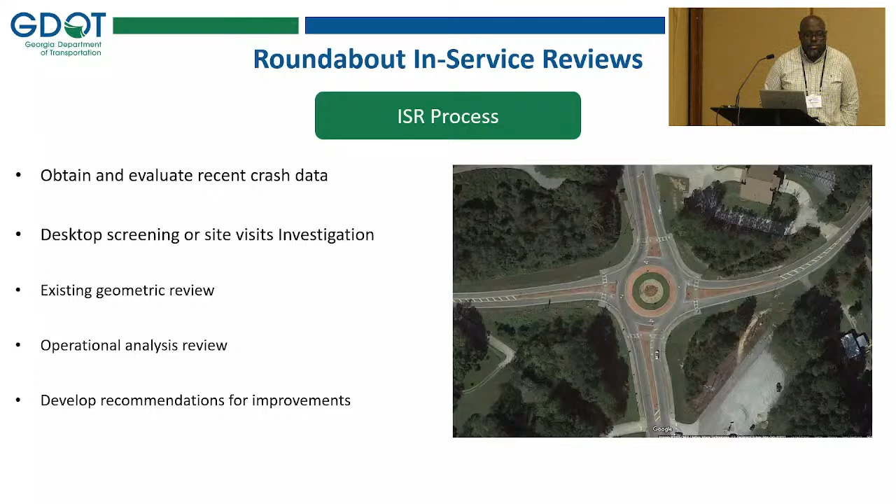So roundabout in-service reviews - we sit down with the district office and go over, at a high level, what the crashes are, screening what's going on, what's on the ground. We look at signs, whether we're missing signs, things of that nature, and operational review analysis. We come up with low-level and some high-level mitigations to make sure the location is operating as safely as possible.

So here, State Route 5 at State Route 166, we have some low-level, low-hanging-fruit type mitigations, like transverse rumble strips, as you can see. Then we have double-indicated yield signs and pedestrian crossings. All these things contribute to the safety of the intersection, as well as promote pedestrian usage.

Now, to take it a little deeper, this is something that would probably need a quick response. Here, we would actually propose flattening out the exit curvature so we could have more space to create more geometry on approach to the roundabout, getting traffic calming that can add more value through slower speeds on long approaches. We're also proposing adding color and texture to the truck apron and center island, along with the D1-5 sign. This would probably take the work of a quick response to implement.

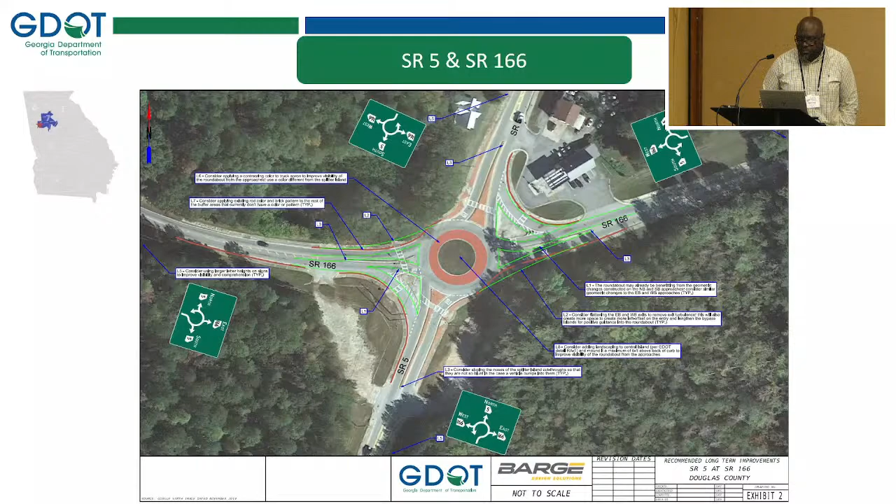Here we have GDOT's design validation checks - something the team often does with roundabout projects - as well as practical design reviews, and updating and maintaining the roundabout analysis tool. We noted that we have the NCHRP 1043; we're still going through that to see how it lines up with our guide and what's new, something we might want to implement within our guidance for roundabout design.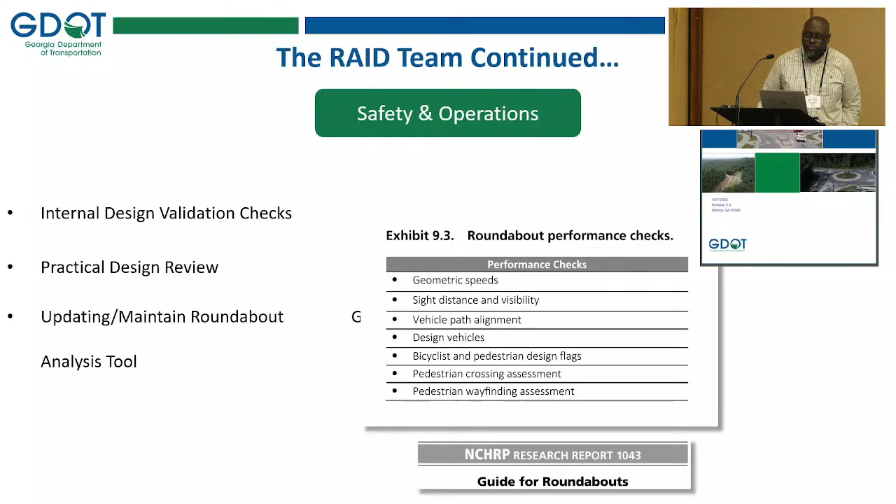Roundabout validation design checks: basically what we're looking for is the fastest paths and roundabout configuration, making sure it matches up with the operational analysis provided. A quick note - if doing swept paths, have different color schemes for the body of your design vehicle, the front axle, and the rear axle, so we know where the cab is going as it traffics through the roundabout.

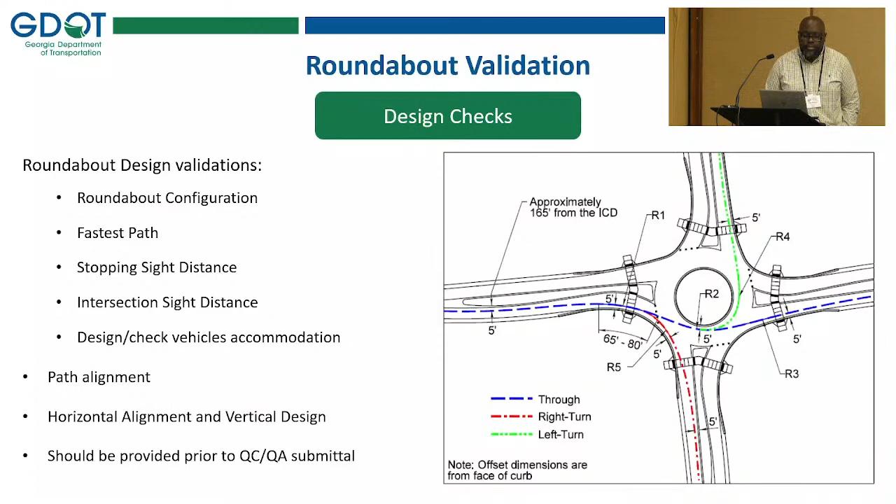Practical design review, or 30% PDR - what is it? It's basically a process where after concept, the design team has a little more information: utility information, more ESA information, where they can place their roundabout and its approaches, and what restrictions they have. Sometimes things change, but for a safety program, those changes really affect the B over C ratio, so we want to make sure they maintain that so projects can get let and still be qualified.

So the team basically looks at roundabouts, DDIs, displaced left turns, and median U-turns - that's what the asterisk is for. Usual submittals are DGN files, mainline files, profiles, that nature, along with their ICE validation.

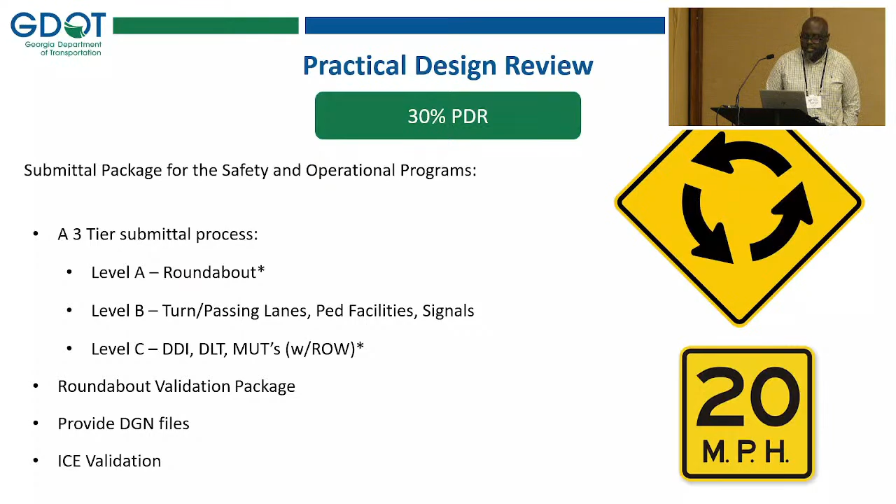So, plan review group. Essentially, we review the concept reports from beginning to end of a project, plan reviews, site visits, pre and post construction, as well as signing and marking SMEs for the office. We update details, provide comments and guidance, sign and mark plans, and host our drone and aerial video for alternative intersections and interchanges.

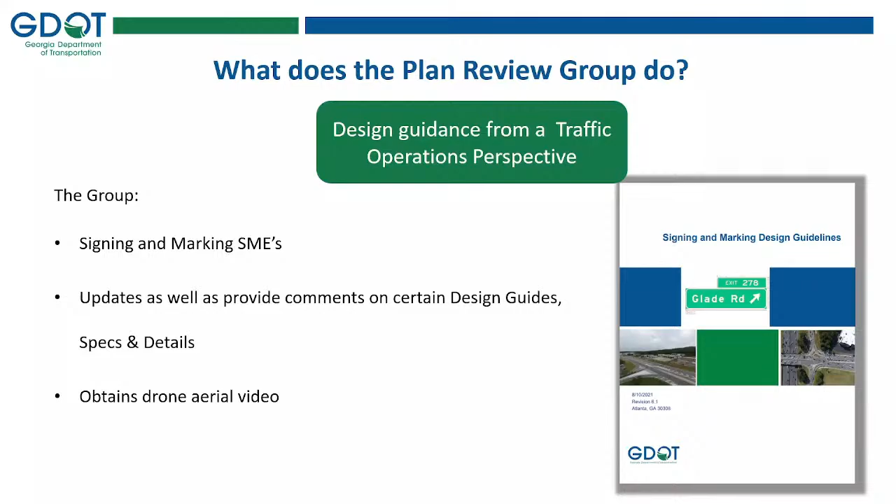There's a typical markup by the team. Usually what's easily missed is not calling out the RA1 detail for the roundabout. Here, we still need to call out the max height of the mounded central island, as well as having a type of header curb, calling out the color treatment and texture for the truck apron.

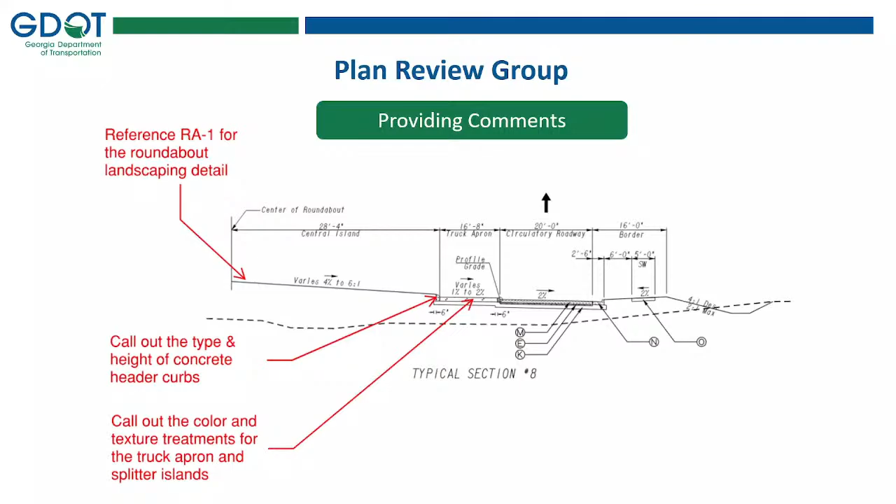As part of the team, we have an on-call service contract with Barge. Their part is to provide on-call support to our internal road design teams, giving over-the-shoulder guidance on some roundabout features where a designer is having trouble getting the exit curvature or approach curvature the way they need it. We provide that guidance, do some roundabout design checks, and conceptual layouts for other teams as well.

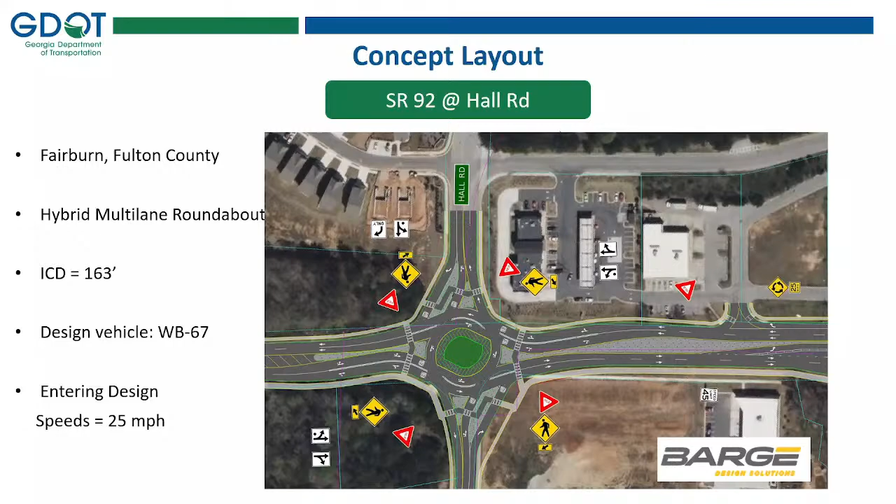This is a concept layout for State Route 92 at Hall Road that Barge provided for the project. As you can see, it has a multi-lane approach with raised lane dividers, spiraling through the circulatory roadway. What's key is that if everybody stays in their lane and doesn't cross over, the raised lane dividers provide much lower entering design speeds, which improves safety and reduces severe crashes. That's one of the key benefits, and it should probably be the default for any multi-lane approach roundabout. Keep that in mind.

Next, we have use-on-construction design. This was our very first roundabout project that we tasked Barge with, at State Route 113 at State Route 61. What's interesting is we had to fit everything within the existing right-of-way, couldn't push anything further, but we still got some traffic calming on the approach to achieve that 25 mile per hour design, as well as provide some bike lanes, bike ramps, and pedestrian accommodations.

I don't know if you can see it, but there are cutouts for the rapid flashing beacons available for pedestrian use. This is just a concept layout, so the real one's probably already in place right now, or is working to be put in place, because we had to do it in 8 months versus the regular design window of 2 or 3 years. So we had to expedite this implementation for the use-on-construction design.

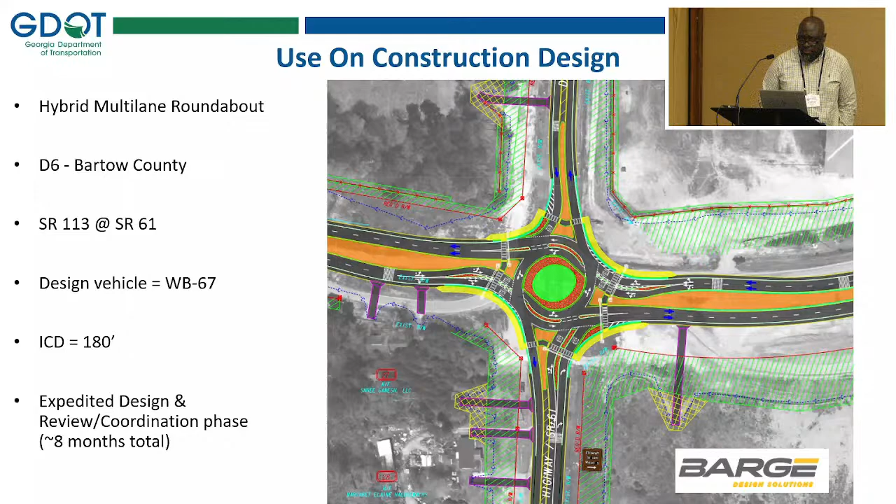Here's a key feature: the raised lane divider. Once again, make it the default setting if you have a multi-lane approach. Start with this configuration first, the raised lane divider, and then work your way to different cases. The safety benefit is basically getting reduced speeds - you're not crossing over to the other lane to get the fastest path. We're mitigating that by trying to keep cars in their lane, preventing them from crossing over and keeping their speeds low.

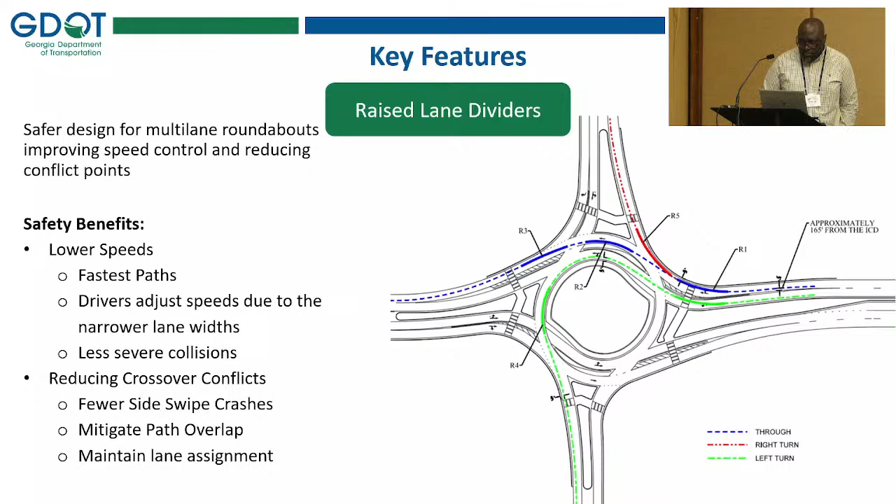So here we have detail about the raised lane divider. Type 9 is the default setting. It's a little bit more forgiving for vehicles that cross up on it, but it's a little bit wider, so you have that instinct of being able to correct yourself and still not really cross over into the next lane.

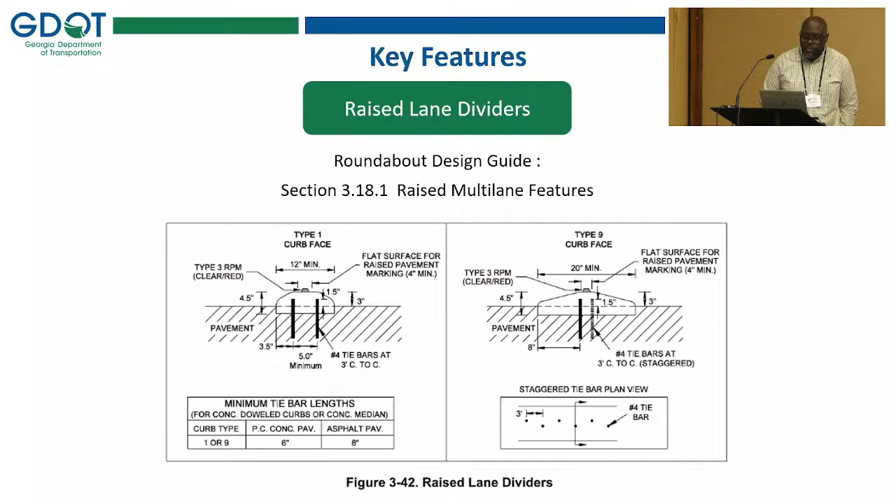Path forward: continuing to work with ITE subcommittees, being able to provide guidance to our internal and external customers, more training, being able to provide over-the-shoulder courtesy reviews and in-service reviews with the district offices, auto-turn studies, and trying to see if there's a way to get more practical design out of how we're developing our roundabouts, so we could reduce costs and spend more elsewhere to get more safety out of the program.

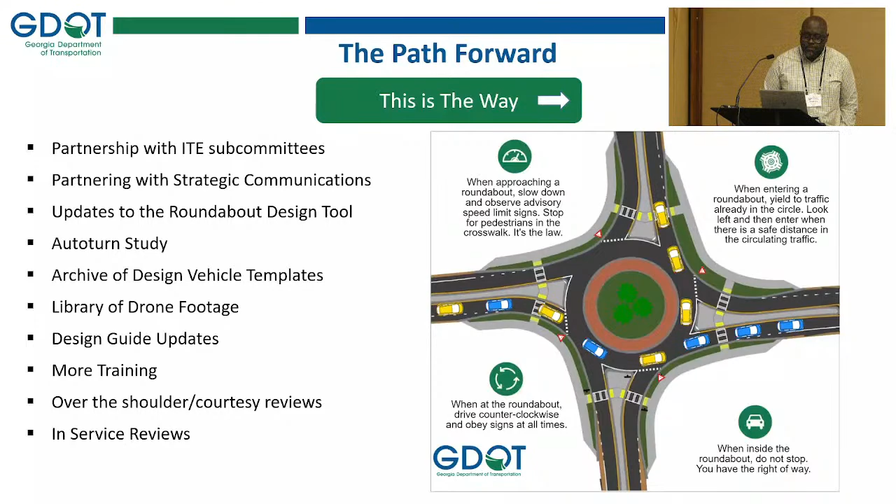Internal services, ICE process - we're providing more and more training for ICE. It's going to be a continued process we have, the ICE and roundabout design course that we had, I think maybe sometime last year, where we were able to fit in like 3 sessions with in-house design teams with GDOT and give them some guidance on designing a roundabout.

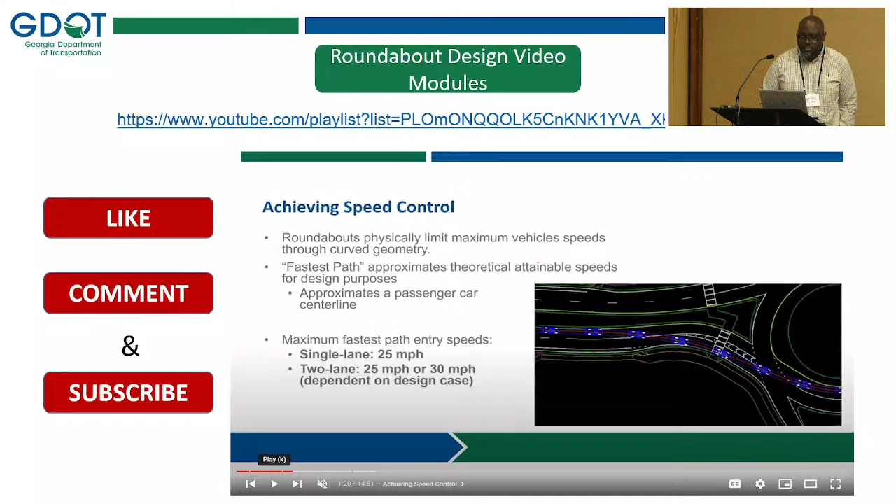And you get to listen to Justin Batson provide commentary on some of the design issues that go into creating a roundabout design. So, cheat sheet, things to take away: get started early in the ICE process, utilize the multi-file summary sheet.

Provide a diagram or layout, especially if you have a corridor project where you have maybe 20 intersections. You're just getting started, so go ahead and provide a diagram. Don't go too far with a layout, just something that shows existing conditions and what you might be proposing later, so we have an idea network-wise how it would operate.

Concept report: provide SIDRA operational analysis layout sheet. It helps tell the story of how you analyze the roundabout versus what you're proposing in the layout, so we can see if there are any significant differences between the two.

If you have a bypass that's not needed but your operational analysis shows a bypass, that's conflicting. So some ways we could save costs is by removing the bypass, checking that it still operates the way it's supposed to. Take those things into consideration.

Default to raised dividers for multi-lane roundabout approaches. And again, if you have corridor projects, do PDRs prior to your QCQA submittal, so you still have a time window to make any changes.

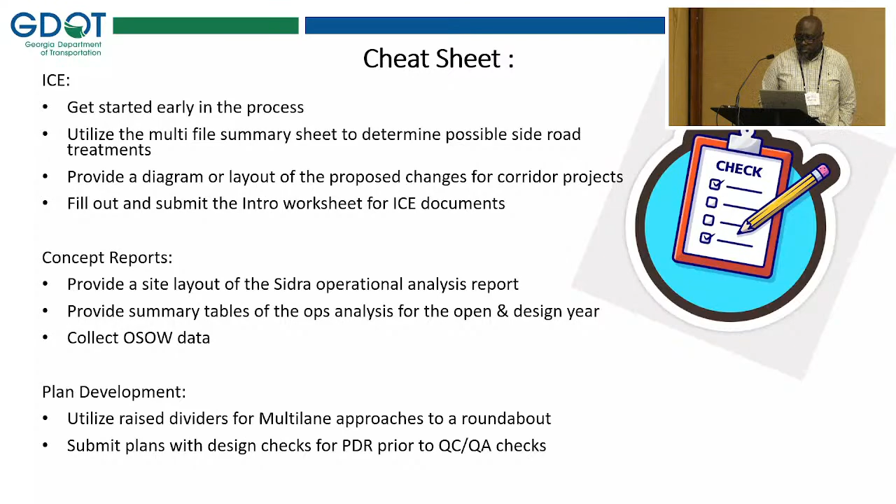For OSOW records requests, provide us your lat-long information, because Georgia has a lot of streets with the same name. You don't want to have the wrong information on an intersection and then come back and say, no trailers go through it — yes, they do. We want to avoid that as much as possible. Go ahead and give us that lat-long information and ICE email.

And that is the end of my presentation.